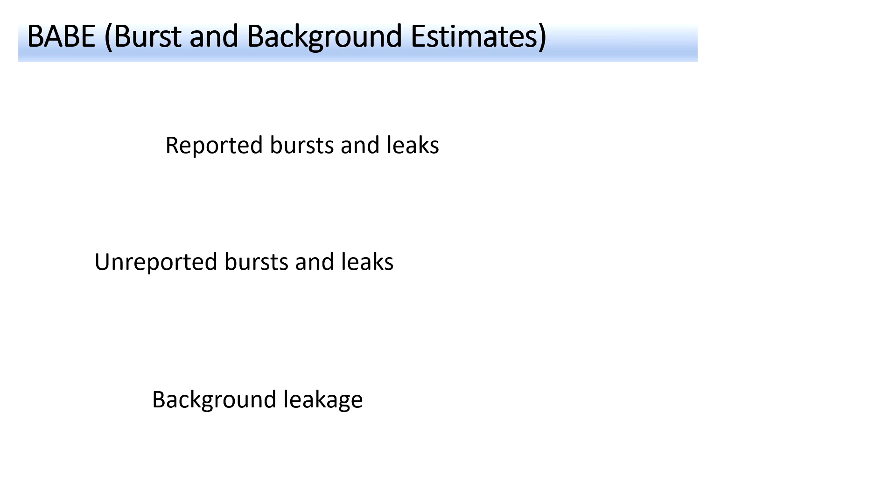Alan then came up with the burst and background estimates concept. I was there the night that he had this eureka moment. So we have reported bursts and leaks come to the surface, don't run for very long. We have the unreported bursts and leaks that you go out and find with active leakage control. And then below that, we have background leakage. And this is my picture of background leakage in a rural area. Basically, it's what you're left with after you've accounted for the other 2 elements.

The other way of looking at it is, I've used this iceberg analogy before. Reported leakage above the surface, unreported leakage below the surface, and then background leakage being the deep dive. But there are various definitions of background leakage. You can see the one that's referred to in the Water UK route map being the level of leakage that cannot be reduced further using current detection technology.

What we focused on in this project that I'm going to talk about is the minimum achieved level of leakage in DMAs. That's the historic minimum achieved level of leakage in the DMAs, and effectively it's what a normal leakage detection suite doesn't pick up. The question we're trying to answer in the project is, can we reduce background leakage? The current definition just accepts that it's there, it's made up of a lot of small leaks, and we can't reduce it unless we do pressure management or mains replacement.

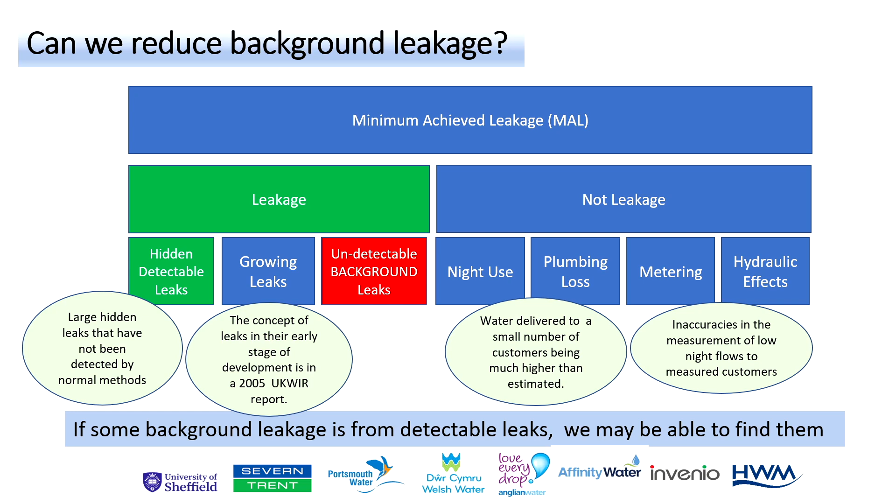What I've shown on this slide before, we're trying to say, is that MAL level of leakage in a DMA, is some of it not leakage at all, but due to these other components? And if it is leakage, is it undetectable background leakage in the red box, or is some of it in the green box, the hidden detectable leaks? So that's the question.

The project aims to redefine this MAL level by trying to locate and then repair those long-running hidden leaks in the DMAs. It's led by Welsh Water with support from 4 other water companies. It's a £3.5 million project, 2.4 million of which I think, according to Ian's slide, is funded from Ofwat. The rest is from the water companies and from other aspects. And then the contractors are HWM and Invenio and also the University of Sheffield.

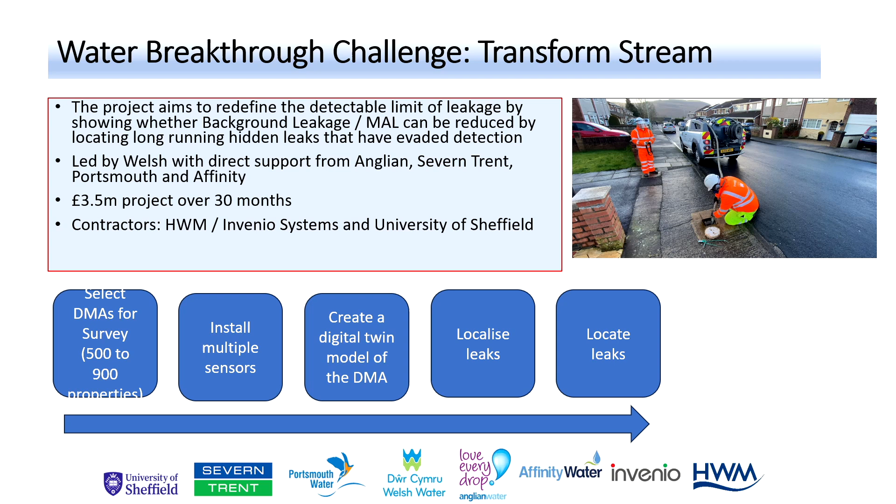We're selecting DMAs between 500 and 900 properties. We're installing multiple sensors of different types. We're then creating a digital twin model of that DMA. We're using that model to localize leaks, and then we're trying to locate the leaks.

We started in late 2022, and the first thing we did was to look at data from the companies. I'm not going to go into the detailed contents of this report, but it is available publicly through that Figshare link on the University of Sheffield website. The key thing, we found that half of the reported level of leakage is due to the MAL levels in DMAs. So that's an important number to recognise.

The DMA surveys that we've started, we have Phase B and Phase C. Phase B, we've done 10 DMAs and we've completed the surveys of those 10 DMAs. We produce an all-connections model of the DMA. We're not grouping demand to nodes in the DMA. Each connection in the DMA is a node.

We've got consumption profiles for each node, for each connection at 1 minute resolution based on our Stop.Watch temperature logger data and other data modelled by University of Sheffield for where we can't get a logger on. We're also now starting to review paradigm data from SME for all of the DMAs.

We're fitting pressure loggers to every available hydrant, between 20 and 25 per DMA at 15-minute values. We're doing transient logging with a newly developed logger from HWM. We're installing acoustic loggers at high density, and then we're combining all those data sets.

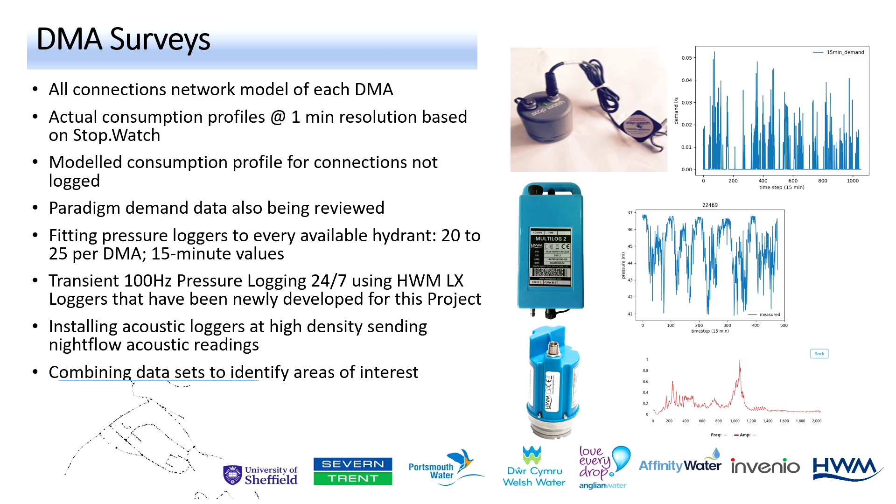So the first thing we do is we do a flow balance. So the top line on this upper graph is the DMA inflow. The green line is how much we're estimating is going past the customer's stop taps. So that's in terms of use events and customer side leakage. The difference we're calling unaccounted for water. It's been reported as leakage, but we can now see that not all of it is leakage.

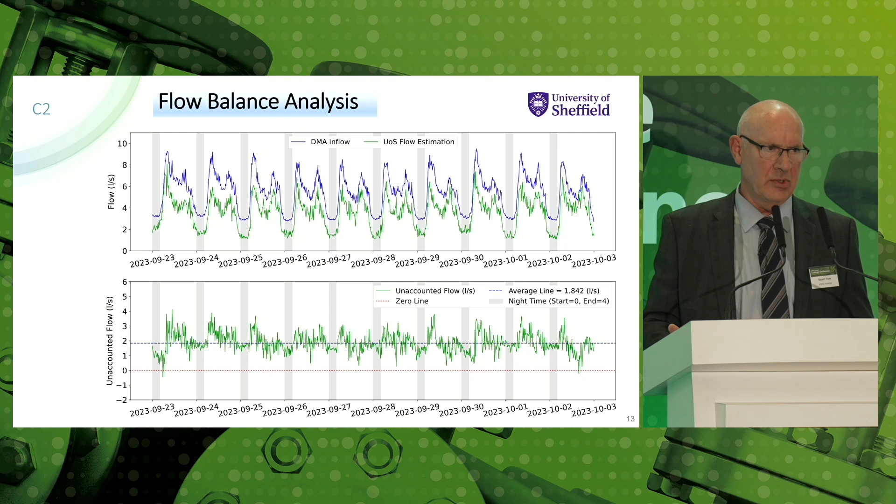Tier 1 is our algorithm saying we're more than 87% confident that that is a leak. Tier 2 is more than 63% confident. So, you know, we're pretty sure these are leaks. And when the water company does a follow-up, we're finding that those leaks are largely internal with some external leaks.

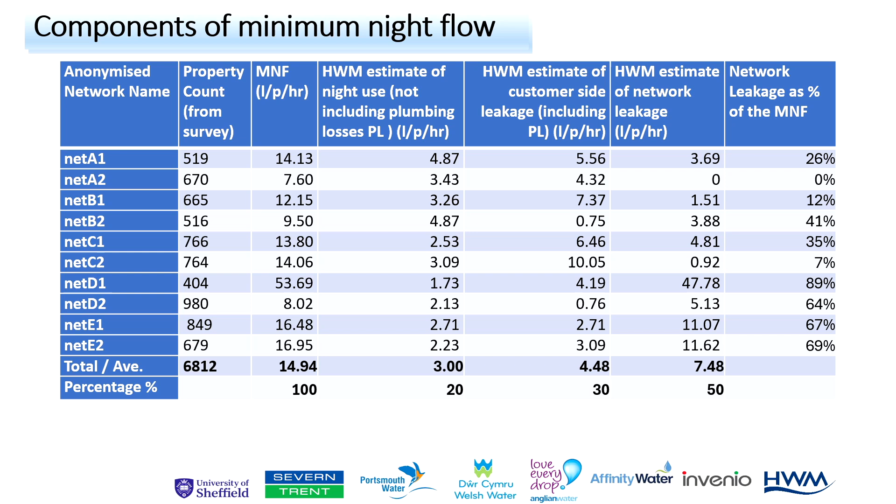So those are ballpark figures, but you can see in the right-hand column how variable that figure is. So the variation in network leakage as a percentage of the minimum night flow is from 0, in other words, there's no leakage on the water company network, to 89% of what goes into that DMA is on the network somewhere. I would like to go into this in detail, but I don't have the time, but no doubt I'll get questions on it. I've tried to show this graphically.

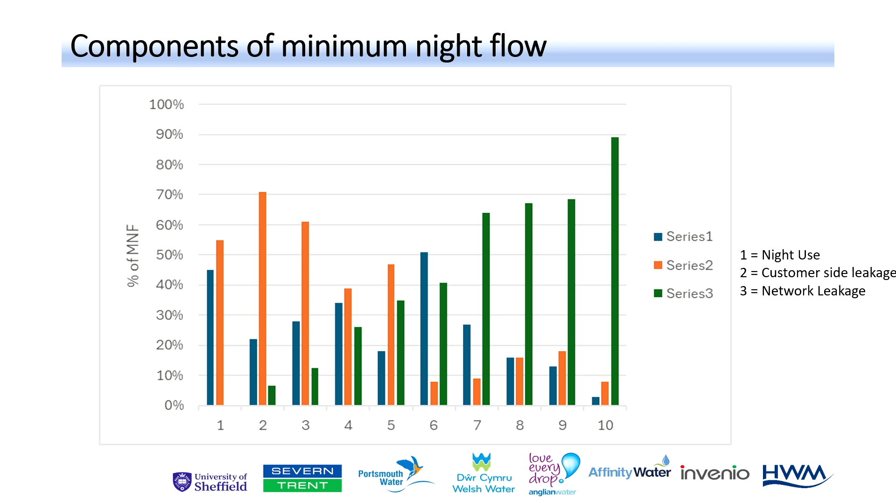So the green bar is the network leakage as a percentage of the minimum night flow, and you can see I've ranked them from least, in other words 0, through to the most. So we've got probably 3 DMAs that have 10% or less of the night flow being leakage on the network, and at the other extreme we have 4 DMAs where more than 60% of the minimum night flow is accounted for by leakage on the network.

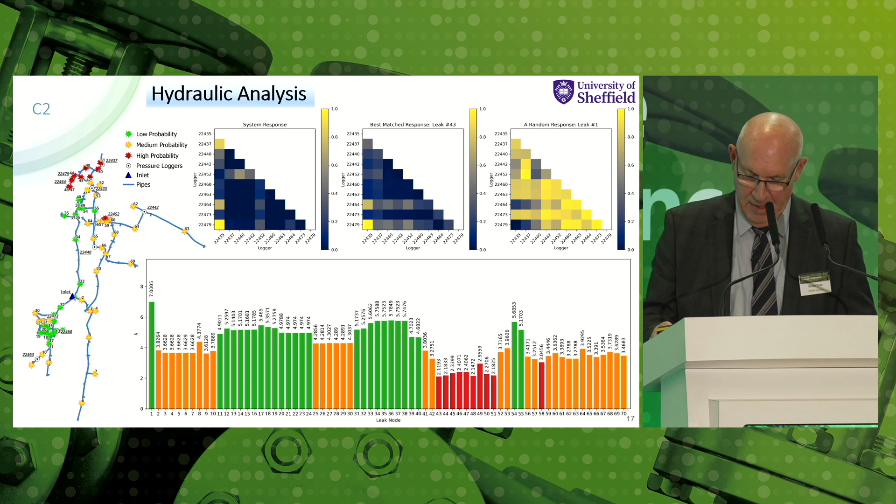They've then developed new techniques on the acoustics. We've got a PhD student working on the project full-time. We're not just relying on the alarms from the loggers, we're actually recording and analysing the acoustic data from the loggers. I can't go into the detail, but where we see these red dots in the top right of these graphs, that is indicating a leak at that point in the network, which isn't being picked up on the alarms from the loggers.

Not a lot of time to cover this, but I've tried to summarise where we stand with each of the 10 areas. If you look at the column marked network leak, yes or no, you can see there are 3 DMAs where we're saying there's no leakage on the network. But then there are 3, 4, 5, 6 where we're saying yes, there is a leakage on the network, and all the data is telling us we should be able to find it.

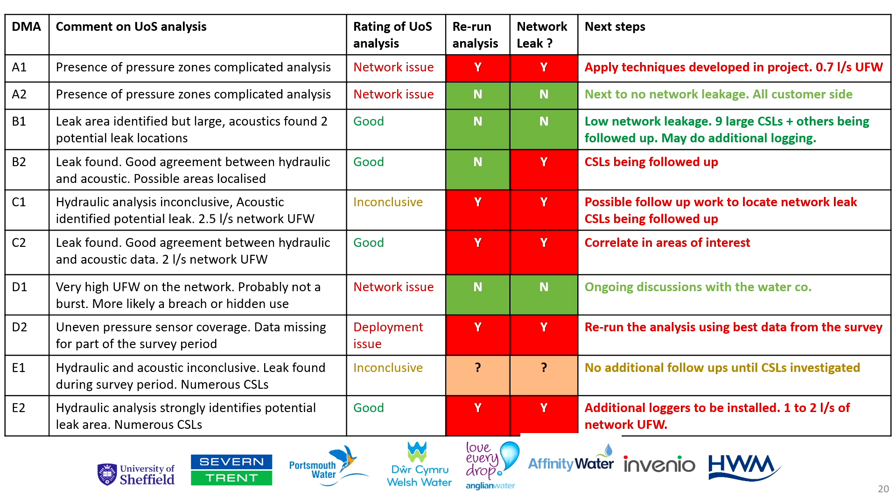When I say leak, there's at least one of those DMAs where we're pretty sure it isn't a leak. It is water going somewhere else. It's too big. The amount of water is too big for it to be a leak that we can't find. It must be something else in the network.

We're also going back to some of the first DMAs using the techniques we've developed to see if these new techniques will help us identify where that leakage is occurring. But I just think that's quite illuminating.

So what learnings have we got? Well, the first box on here I showed last year. What we're saying is it's highly unlikely that background leakage is due entirely to small leaks below the detectable threshold, as defined in the managing leakage reports. All the information we're getting is suggesting that isn't the case. We're not saying there aren't any small leaks, we're just saying that doesn't explain the whole of background leakage.

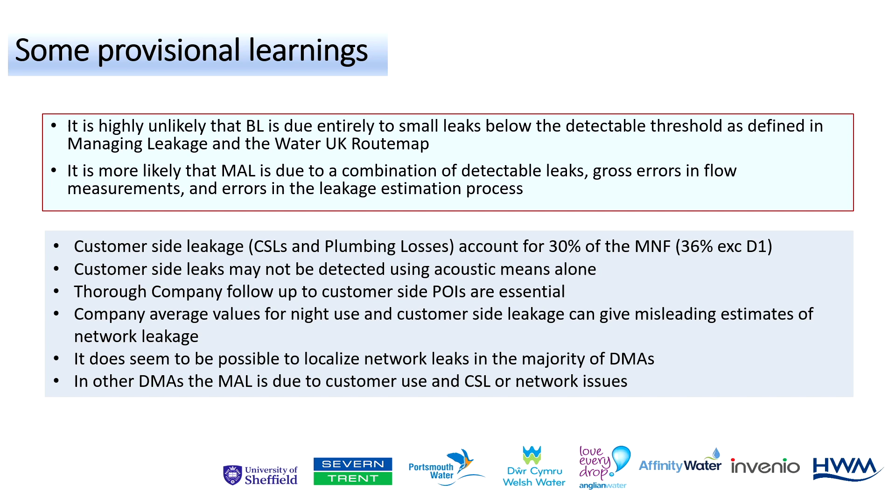It's more likely that minimum achieved level is due to a combination of detectable leaks, errors in the flow measurements, and errors in the leakage estimation process. What we're also saying is customer-side leakage accounts for 30% of the minimum night flow. If we take one of the areas with the highest level of network leakage out, it's 36%.

Customer-side leaks may not be detected using acoustic methods alone. We've got various examples where we pick up a leak with a stopwatch, which you can't hear on the stop tap. It just doesn't make enough noise to transmit to the stop tap. Thorough company follow-ups are required on those points of interest on the customer side.

The average values that you have for night use and plumbing loss do not apply at the DMA level. There's just too much variability, not just in night use, but also in plumbing loss. So if you have an average plumbing loss value of 1.4, which was the UKWIR report we did a few years ago, if you apply that 1.4 to every DMA, you could be misleading yourself.

You can have DMAs that have a very low level of plumbing loss, which we've seen in a smart metered area in one of the water companies, and then you've got areas which have a high level of plumbing loss. We're also saying it does seem possible to localize these network leaks in the majority of DMAs where we're convinced there is something. In other DMAs, the anomaly is either due to customer use or customer-side leakage.

Last slide, probably pleased to know. Where do we stand? We've got to follow up the actions in 4 or 5 of the 10 Phase B DMAs. We're on with the Phase C DMAs. We've done 5, we have to do the rest.

Phase D of the project is an uncertainty analysis, which we've brought Steve Toombs back into the team to help with. We need to consult more with the industry, and I'd appeal for people to get in touch with us with any stories or ideas they have. Phase E is the reporting stage, and we need to disseminate the results, and we've had some support from Arup on that. I started with an elephant.

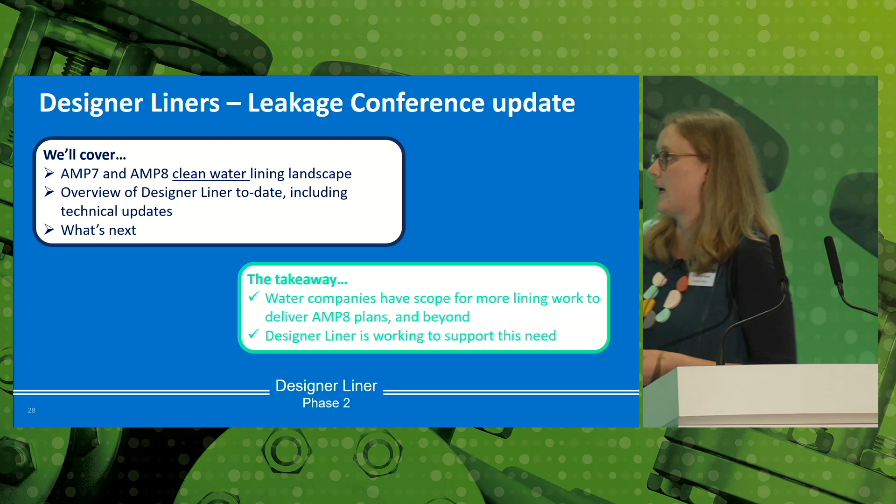We just keep digging holes and replacing pipes. We cannot afford that, and we have to think about rehab. Designer Liner, I hope we can show you today, is starting to support that need and reinvigorate some of the lining sector.

A bit of an overview of the project - why are we doing this work? We started off with an UKWIR project, then had phase 1 of the Ofwat Innovation Fund project, and we're now on to phase 2. To date, the project has had about £3.6 million of investment in total.

There are a couple of challenges we needed to address with lining. Regulation in this country around lining is really stringent. Suppliers, installers, and water companies said that is really hampering innovation, and they were not going to invest unless somebody did something differently. So it was an ideal project for the Innovation Fund to look at both asset lifespan, and also leakage.

Testing - people said, I'm not confident in liners. I don't know if it has a long enough lifespan. Is it going to deliver what it's needed to deliver?

A bit about the ambition. Manufacturers and installers said, I'm not willing to invest in the UK, I see no ambition here, so we need to reignite that. People were also very uncertain about the cost of lining, and this was an opportunity to use some sector funding to address that.

We've been funded by the Ofwat Innovation Fund, which is fantastic. The overarching aim of this project is to develop a new lining solution and route to market. We want this lining solution to be fit for the 21st century. We are not knocking what is on the market, but we think we need to do better. So we're looking for something with an assured lifespan that will deliver the financial benefit you need in order to invest in lining.

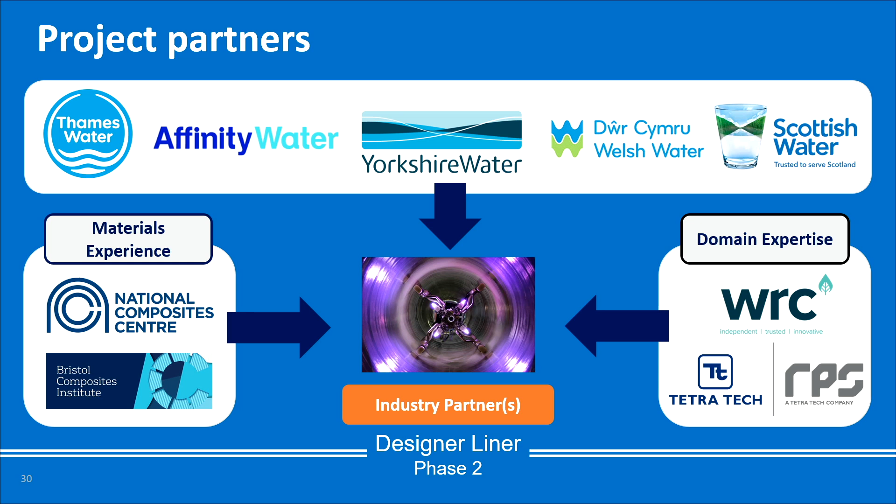We're now at the point in the project where we can start to look for those lining industry partners, and we've had manufacturers knocking on our door saying, can we get involved? And we've had to say, no, not yet.

Because the point of this project is to really design a lining solution that water companies want and need, not one that a lining manufacturer thinks we need. So it's important for us to own that design process. Joe will talk about that and the decisions we've started to make to ensure we get a lining solution that's right for us, not one that's simply delivered to us.

Thanks, Katrina. So the lining landscape, as we see it at the moment - you're hopefully aware, those of you in water companies, that your business plans have all got a significant increase in the amounts of mains renewals you'll be doing. However, if you look at what the PR19 planned renewal percentage was, 2.07, and what the planned PR24 percentage is, you'll see there's not that much difference. However, actual performance at 0.64 suggests we've got a long way to go.

So we need to do things subtly differently. £2.3 billion will be spent on mains renewals in the next 5 years, averaged at £277 per metre, thanks to Ian's colleagues. However, when we've looked at it, we think the lining solutions will be around £175 a metre.

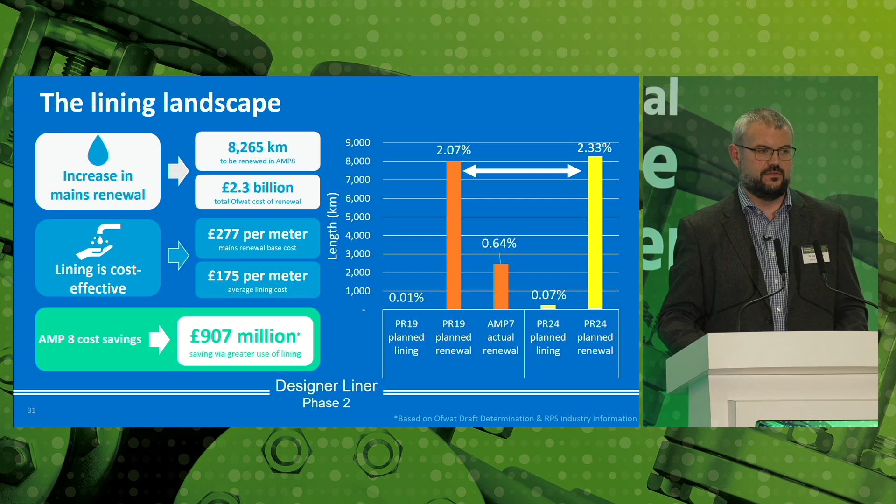Which means there's a potential AMP8 saving of £907 million. Think of all the things we could do with that 907 million - we could do X amount more kilometres, lots more PRVs potentially, a leakage review potentially, Ian. So there's lots of potential things we could do with that money. And again, this is £3.4 million of expenditure, which we think is going to pay back 907 million in a 5-year period. That's a pretty good payback in anyone's book.

So where have we got to? Fundamentals - and this is where we've all been taken back to school by the guys at the NCC, which is fantastic, about how you actually go about doing these sort of projects. These guys do these sort of projects for some people you might have heard of - Formula One teams, the British cycling guys. And again, if you ever get a spare few minutes and you're in the Bristol area, give Keris a ring and get a site visit, because oh my God, it is geek fest of the stuff these guys do.

The big spinner that they can weave stuff with, all of the stuff where they're like, oh yeah, you can't look in there, that bit's top secret, can't look in there, can't look over here, that bit's top secret. You can look over here though - we're doing smaller stuff that you can look over here.

But all of these things where they're looking at how they can manufacture a wing - is it 30 seconds, I think, for the full layup, something like that, Keris? Yep, they're not there yet, but they're looking to do it in 30 seconds rather than the sort of 20 hours it is at the moment. A full wing for a full aircraft, mind-boggling sort of stuff.

But one of the things they've said to us is that you need to have this design intent document - what is it you're actually aiming for? And we were like, well, we've got that - we want a liner that lasts a long, long time and doesn't leak and all of this stuff. And they're like, yeah, you've got to be a little bit more specific about this sort of stuff. So we've had to go through a load of load cases, do the material analysis, and that's allowed us to get to the sort of structural model type approach we're looking at.

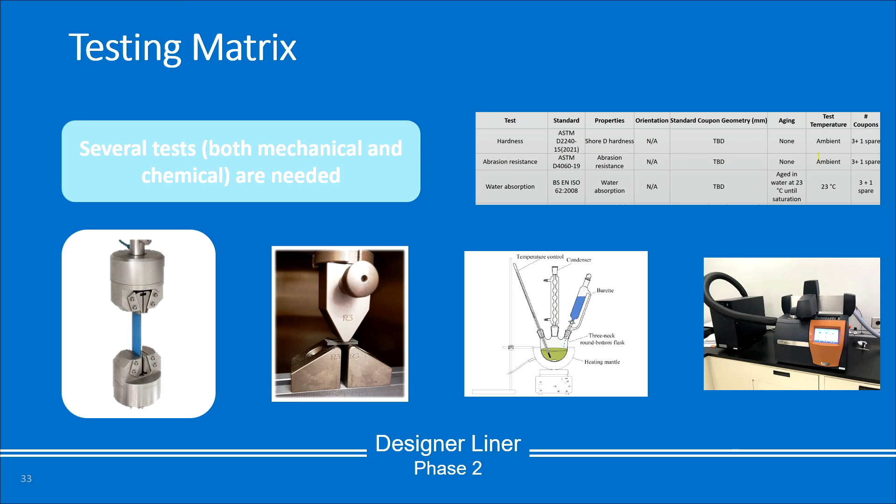So there's stress testing, impact testing, the leach testing we've got there, and then the thing in the corner - probably only 2 or 3 people will recognise - is a differential scanning calorimeter, which tells you how stable your polymer is. That's the thing I used in my PhD for loads, so I had to get a picture of that in. But these are the sort of things we need to look at and understand how they're going to make the material better.

But also we've got the material science bit that comes in, and this is the bit where in all the hair shampoo adverts of old, they go, and this is the science bit, and some boffin sort of explains the science bit. We don't have time to go into the full science today, unfortunately. But the one thing that we need to do is that we're looking to evolve these materials.

We've got lots of different additives that have been used in many different sort of things, from, again, the boats that were used for the America's Cup, the way that people have been looking at structures for fins in propellers and that type of stuff that have got this toughening and healing sort of properties.

And again, the thermo-reversible, photo-reversible sort of way that, i.e., as Katrina said, we could put a pig down that heats it up slightly, or even puts a bit of UV light, and all of these micro cracks that we get at the moment in polymers would start to heal themselves, not technically self-healing, but for everyone here, heal themselves.

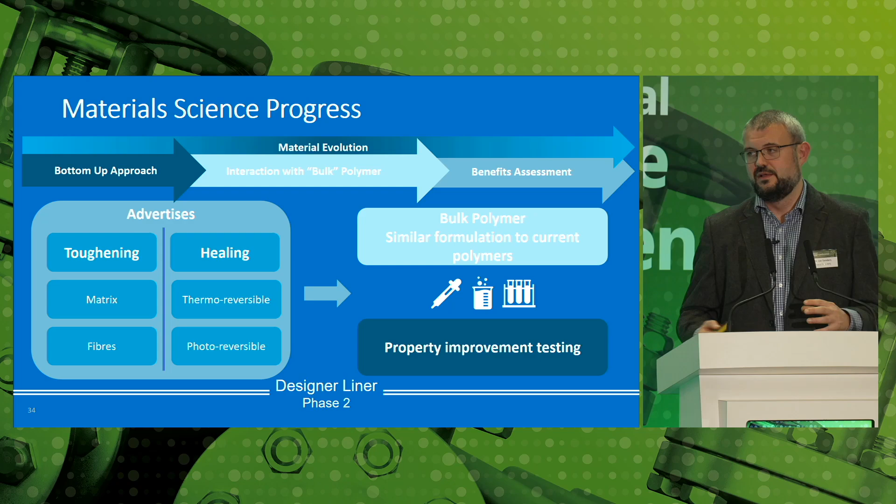We also need to understand what the matrix and the fibres and how they're going to interact as well. And again, this is where we get the guys from the BCCI. We've got 2 fantastic postdocs working on these and understanding how they're going to work through. The thing is, we can't just go to a manufacturer and go, can we have a load of your product so that we can test it for a while?

But what we are doing is using bulk polymer products that are available readily off the shelves from anywhere and understand how these additives impact these polymers. This will give us a starting point to then go and do that full piece with the lining manufacturers and say, based on this, which is very similar to your polymer that you've got, it has done this. It has increased the lifespan by X amount. It's been able to self-heal. We've done this.

One of the things that the BCCI think might be possible is that actually just from the thermal transfers the water has between summer and winter, that might be enough heat to close these cracks. Now this might be a point where actually we don't have to send anything down. Now wouldn't that be fantastic? This pipe just improves itself.

So the water, again, polyethylene is very much degraded by water, as the Upware project showed. But some of this stuff now, potentially if you add something else into it, the water then starts healing itself. Fantastic. So that's the progress of where we are now. I'm going to hand back to Katrina just to sum everything up and look at the timelines of where we are going forward.

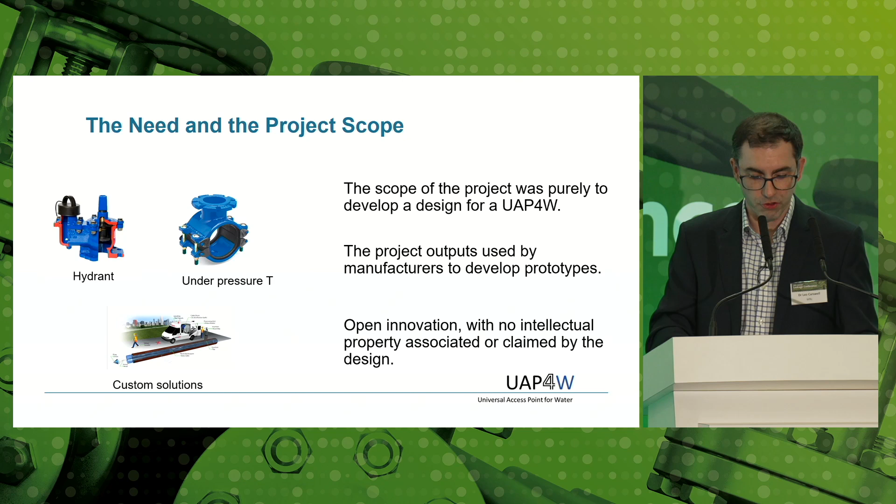So I'm going to talk a little bit about challenges and vision and specification. I'm going to talk through this quite quickly, but it was a key part of the process that we went through. So we started off with some workshops on this project, again, with lots of stakeholders. And one of the things we asked at that first workshop was about, what's your vision for this universal access point, this so-called universal access point?

And a number of key points there people were talking about. We'd love something that's just usable by the water companies. We don't have to worry about the fire service needing to use it. We can install it rapidly. We can install it opportunistically. We can install it when we have an opportunity to install it. So we have a leak somewhere. At the same time as repairing that leak, why don't we put an access point on there? That way we're building up the potential to be able to survey our network.

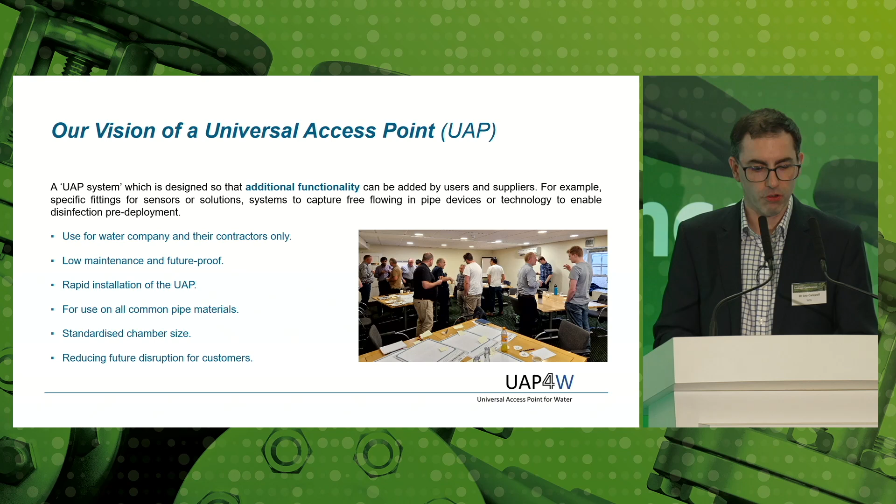A key point that the stakeholders fed back to us: don't get drawn into trying to make this universal access point do everything and be super complicated and have all the functionality. Create something that is suitable for the network, suitable for the industry, but supply chain, with their wisdom and their technology innovation, in the future can bolt onto this and add new things onto it, and it can evolve in the future. So that was a key point.

We also challenged ourselves to look at the barriers and some of the challenges with this type of technology. And I think we recognise that developing new technology in the water industry is quite challenging. We've heard already about implementation and adoption of technology. We're getting better at it, but it's still very difficult in the water industry. It's a slow process. So we challenged ourselves to look at some of this and the sort of things that the stakeholders were talking about.

You can imagine we're talking about putting a lot more access points into the water network to understand it better. People are immediately thinking, what's the risk in terms of water quality? We've got all these access points. How do we get water companies and manufacturers on board with this concept, this idea that you're developing? How do you turn this project into a product at the end? How do we remove the barrier of installing something into the network and the time that takes, and value installing that into the network?

And we came up with a design specification. So, with all these stakeholders, academics, contractors, all chucking things in from different sides, we came up with a specification. 28 items, and some of the key points there. So, obviously it has to meet Regulation 31. We were talking about a 100 millimetre access point that you can put something in. So it's 100 millimetres, so it's larger than current access points, suitable for a range of different pipe materials, range from 80 mil upwards, so it's suitable for use within the distribution network.

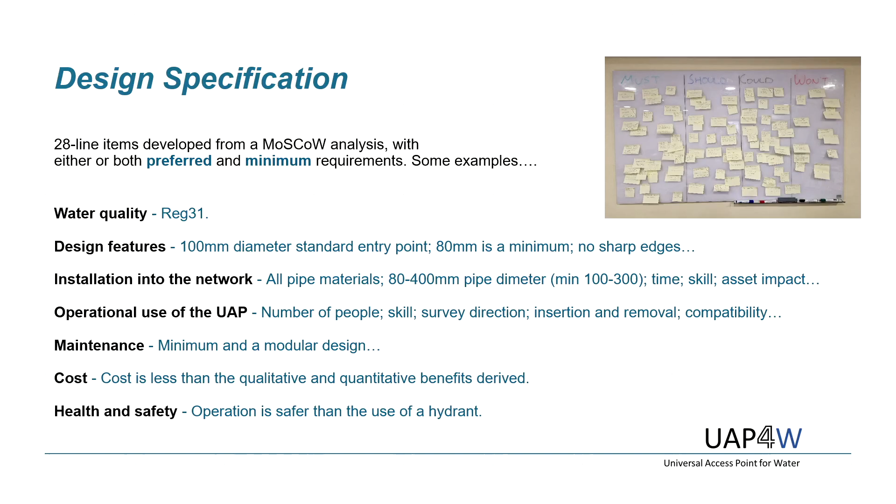We've got access points on trunk mains. That isn't where the challenge is. The challenge is understanding the DMA better. And of course, managing maintenance and cost and things like that. So, I'll talk a little bit about the economics. It was mentioned in the last talk. No point in designing something if it's super expensive and super complicated, too expensive for the water industry to adopt. So we actually spent quite a lot of time understanding the use cases and the benefits for a UAP, and understanding the numbers of technologies that you might adopt. Therefore, positioning this so a technology supplier could take this forward afterwards.

And I've summarised the whole report into one page, but the feedback from the water companies was UAPs could help us with pipe condition assessment, they could help with access for sensors and robotics, and they could help us with DMA leakage. They were the top use cases. And through some quite detailed modelling and analysis, we were able to look at the sort of numbers of these fittings that you could imagine the water industry may be installing in the future.

And it's quite considerable. I've put a very brief summary there, but between 70 and 370,000 units we could imagine. And these are quite conservative estimates based on specific information of our networks and those use cases and the benefits that they could deliver. It could be a much larger number. But the importance of this is that if someone is going to take on board the outputs from this project and develop a product which they're going to sell, they want to understand that there's a market there. And this is the foundations of understanding that market.

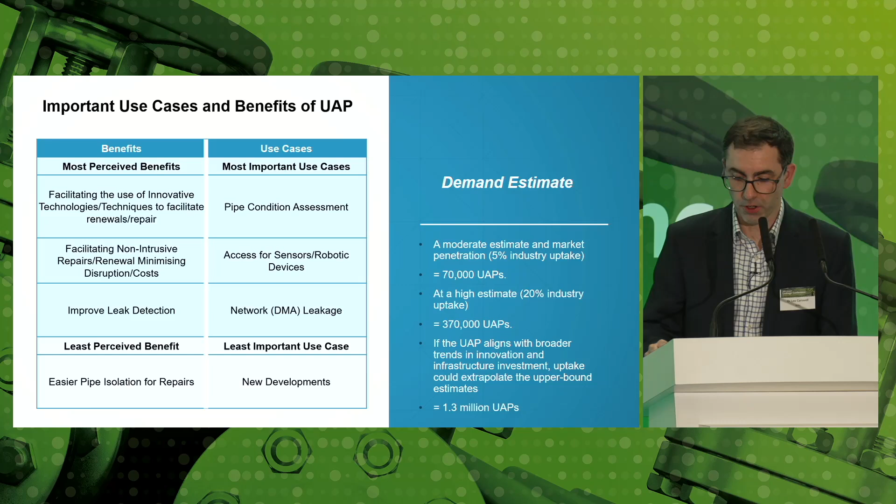So, talk a bit about the designs, because actually that's a lot of what we did. So, our objectives were to develop some design ideas based on the specification and to engage with a range of stakeholders and challenge those design ideas. So they weren't just WRC's ideas, they weren't just Jez Heath's ideas, they were ideas that had been challenged by the industry, by our sector.

So we developed four ideas, four concepts, and I'm not going to talk about these four concepts here, but initially we developed four very different ideas. They were taking the challenge that the specification set and interpreting them in different ways. And we took those to the stakeholder group, and we had a workshop where they assessed those and scored those against the specification. And these graphs, if you can only spot the red and the green, that's all you're meant to be able to see.

We found that two of these aligned better with the specification, and the green shows where they align better with the specification, those individual items, and the red shows where they don't. So we had two ideas that the group thought were worthy of taking forward, and two ideas that probably weren't. Maybe they were too complicated. They couldn't quite see how they should be taken forward.

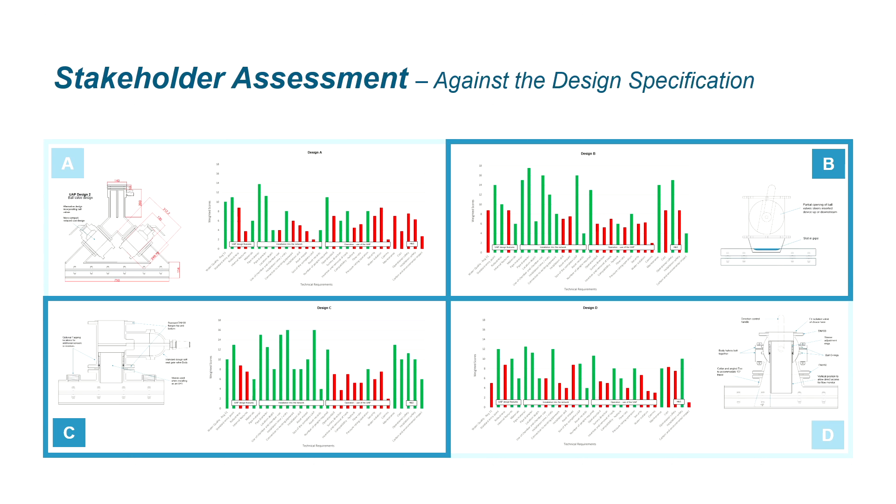So the next bit of the project was to refine those ideas, take those ideas further and closer to something that could then be adopted by supply chain. So there's two ideas that we took forward. Our objective within the project was just to refine it to one idea. But with all good research projects, things change as you go through, and we had two good ideas that complemented each other. They were different, so we said, well, why don't we take both of them through? That gives more options for the supply chain to look at by the end. So we've got two ideas here.

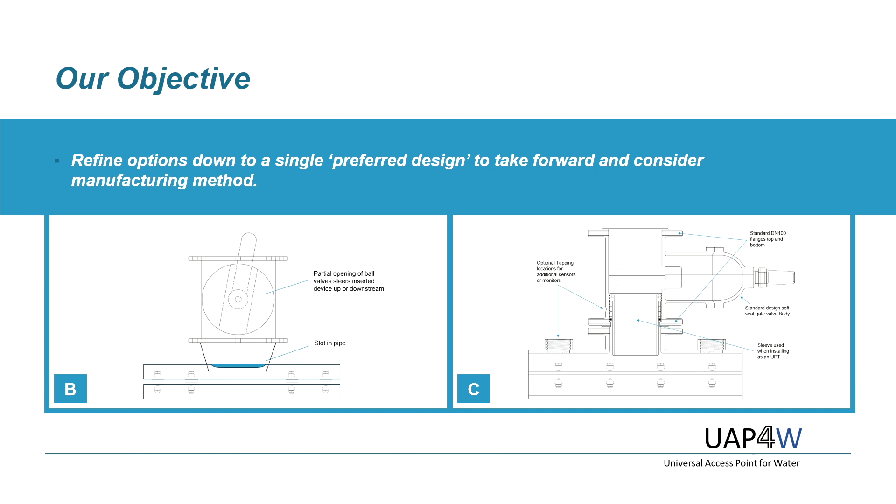The first one on the left, B, is a design that's based on a slot that's milled into the top of the pipe. It's a repair clamp with a milled slot and a ball valve that you can use to angle the access into the pipe so you can go upstream and downstream. The second design, much simpler, 90-degree design, but is focused on including an element which protects any technologies you put in from the cut edge that you would have from coring out a pipe when you do a live coring activity. So two different approaches, and I'll talk a little bit about those in a minute.

First of all, partway through the project and in parallel, we looked at some slightly different technologies. These are live tapping technologies which can be installed live, and they provide a stop valve. So these are technologies that are not a UAP, but they're quite interesting because they incorporate live milling or coring into the pipe. They actually incorporate live coring to the full diameter of the pipe.

So you can imagine using some of this technology, you can actually get an equal T on a pipe. So on an 80 millimeter pipe, you can have an 80 millimeter connection onto that pipe, which is not what you can do using conventional saddles and technology. So quite interesting, and it's a bit of an enabler to be able to evolve some of our other technologies. So I'll talk about the two designs very briefly.

There's a huge amount of information that the project has produced, which is freely available, and I'll signpost that to you at the end. But this first design is Design C. This is all about protecting the cut edge, which you get when you do a live tapping. So this design utilises existing components. We've got an existing repair collar, an existing valve. The really interesting, clever bit is the bit that's actually sitting between the valve and the repair collar.

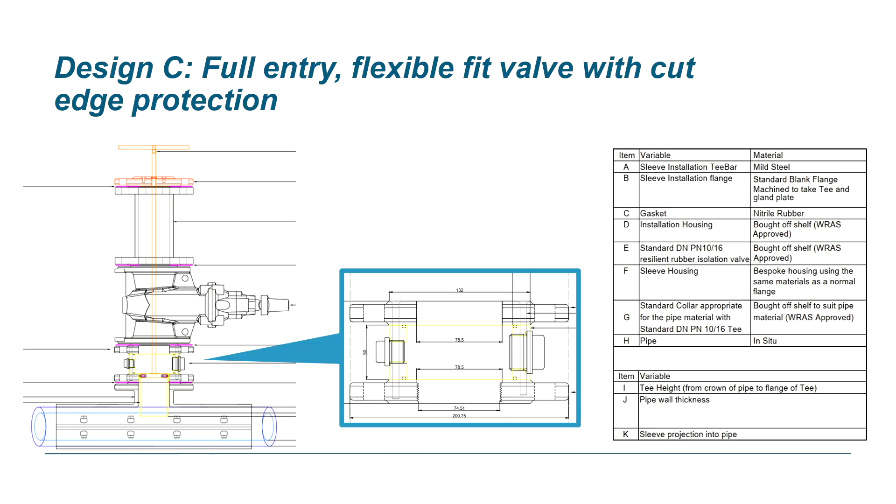And this is the bit where the sleeve that goes down into the pipe is held, and also it has the potential to have tappings. So you could put a sensor on there, or you could do an air release valve. And this is all made with products that are already standard in the industry. They all have Reg 31 approval. They're all relatively low cost. So this was all moving towards that direction.

The second technology, a little bit different, was around using, as I said, a ball valve. So this again uses a standard repair clamp. The concept with this one is that you could mill a slot along the crown of the pipe, going along the pipe, and use the ball valve to angle, whether it's a tethered technology or not, the deployment of that upstream or downstream. And that gives you more control of the deployment. So.

And my final slide, Bob, hopefully I've helped you catch up a little bit of time, maybe.

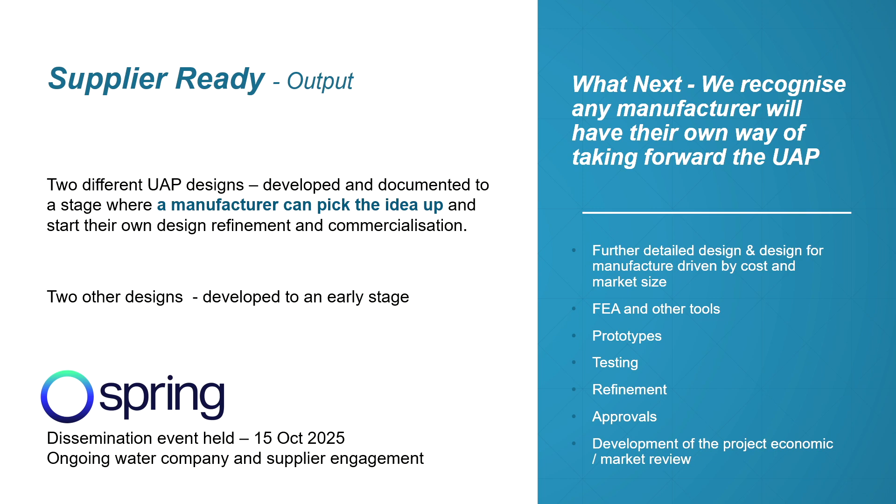So, yes, this project was all about developing concepts and ideas. It was not about building prototypes, building something that would be trialled. The expertise in all of those aspects in terms of prototyping, design for manufacture, design to be the right cost, the right materials, approvals, sits with the supply chain.

And that's the next step for this project, is to take the ideas that we've developed here, and for the supply chain, a number of suppliers or a single supplier, to take those without any IP restrictions and evolve and develop those to supply a solution back to the water industry.

Finally, we've been engaging with Spring. There was a dissemination event back in October. The recording of that is available on the Spring website, and all of the outputs from the project will be as well. And Spring will be supporting the project going forward in terms of engaging with suppliers. That's it.

So I think we've got a couple of questions for Leo here. Firstly, with so much suspected losses deemed to be on customer supplies, no, that's not the one. Sorry, I did see one here. I can remember it actually. The concern was basically if we're going to be putting all of these devices onto our network to get better access, what does that do to our background leakage?

Yeah, you are creating more points in the network, aren't you? So I would say, obviously, there's a benefit. The whole concept of this is it gives you access to be able to monitor for leakage, to be able to detect that leakage anyway. Just got to make sure the workmanship is right. Just got to make sure that when these are installed, they aren't leakage points in themselves, and they actually have the function that we're envisaging, that they're a benefit to us, not a leakage point.

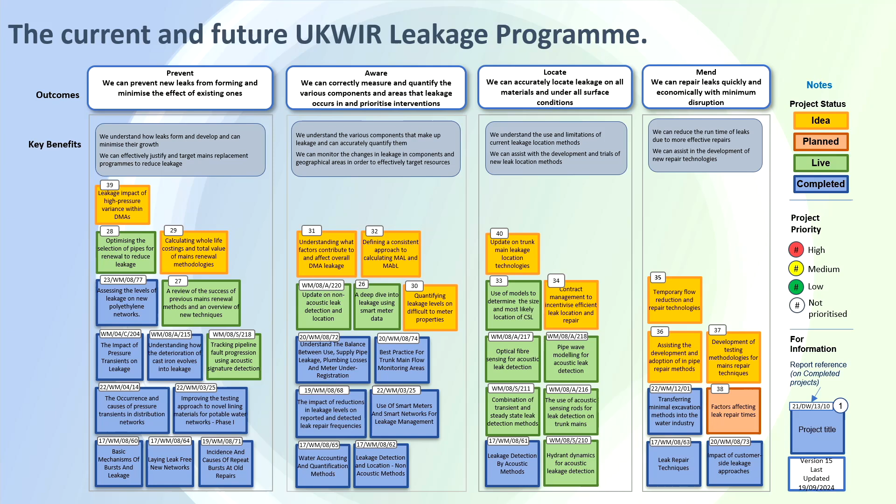Blues are projects completed, greens are live projects at the moment, oranges are projects coming through, and the others are ideas we've had in the shower that we thought were good. There's a load of work going on there. We are the busiest of the UKWIR programmes. We started well under Dennis Deller, and we've continued that momentum.

We've done the Leakage Innovation Heat Map, published and available from the UKWIR website - there you go, thank you for actually using the QR code, wonderful. This was basically born out of when I came into the industry and started doing this on UKWIR, somebody said there's a lot of duplicated research. Okay, let's find out if it is. So I went and visited everybody, I said share your research plans.

Do you know what? We collaborate. Ian talked about that earlier - he said look, you need to do collaboration. And I said, okay, how can we collaborate more? Because in my view, this group is one of the most collaborative in the industry. Leakage, water leakage, is held up as being the exemplar of collaboration because we share.

400 water company projects, UKWIR projects, Ofwat funded projects, spring knowledge shares, all gathered together on one Excel spreadsheet where you can find out what's going on and who's working on what. Well received, as I said, by water companies, suppliers, and regulators as well.

But we recognise that it goes out of date. I did it originally in 2019, the first time. In 2023, October, I did the same again. Provisionally, in 4 years' time, I'm going to be travelling around again and doing it again because it goes out of date. We need to keep it up to date, we need to understand what's going on. You can tell Doug, by the way, he knows.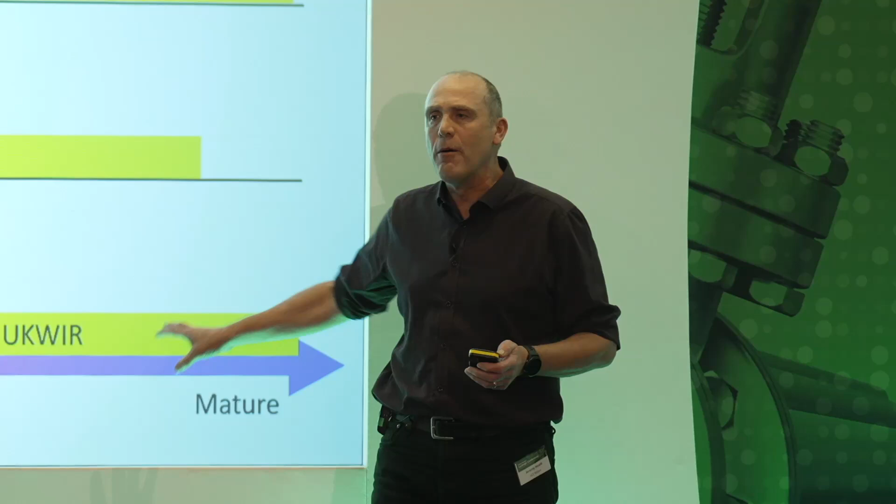Now, that's not to say that we won't see new solutions coming through. My own company adopted a new solution precisely in that area. But most of the research we're doing in that area is effectively going, who's doing it best? A bit of comparator stuff - everybody's got one, how do we just optimize this?

So our UKWIR research tends to be up at this end. Locate, you can see, is pretty wide - we've got stuff that's well developed and in situ, acoustic networks that have been rolled out, and we've got brand new developing systems coming through like satellite, dark fibre and things like that. People are saying, okay, how do we do it best, but also how do I actually install it?

Prevent has the widest breadth because over here we've got PRVs that we've been putting in for decades - well understood. But at the far end on our prevention side, as you've been hearing today about network calming and pressure reduction, how do we manage that, how do we bring that in sensibly? So it has a really wide breadth for that one.

And then finally, as you can see on Mend, okay, in terms of our UKWIR research, we're really at the fundamental stage there of saying, what's the cost benefit? But that's only the UKWIR programme.

When you look at the water company programmes, you can see that they fit out into far wider areas. Water companies are going all the way back to the fundamentals and going, yeah, UKWIR may only be looking at the best practices here, but I've just seen a new supplier and I want to have a look at what they're doing. So we've got a really wide breadth there from the company side as well.

Ofwat Innovation Fund takes you from mid-TRL levels up to almost BAU, late TRL levels and things like that. So we've got the Ofwat Innovation Fund projects coming through.

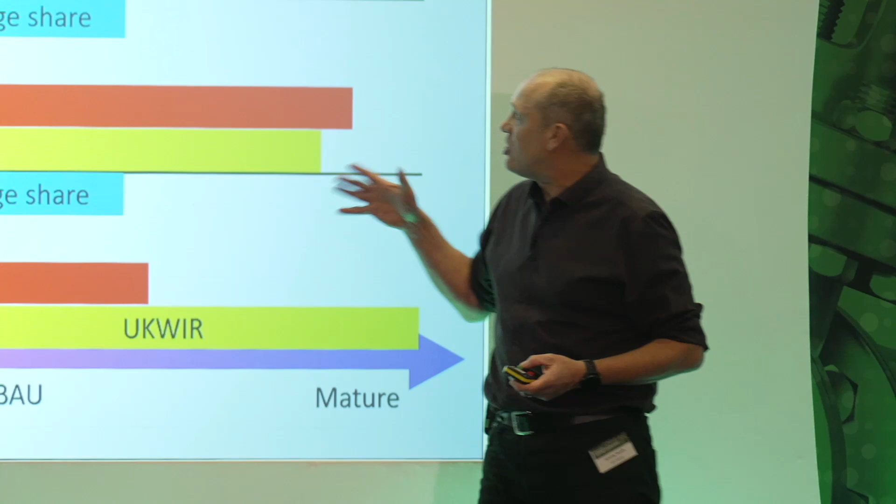And then, of course, there's the Spring Knowledge Share as well, that effectively says, okay, when it's nearly ready to go to market or has been done in trials and is being rolled out, it starts to be shared on the Spring Knowledge Share. There is a wealth of information out there about what is going on within this industry.

I was asked earlier today about where we sit in the UK as an industry in terms of our water leakage - where do we sit internationally? I was talking to New Zealand, it's one of those things where you get up in the middle of the night to speak to New Zealand. I was talking with them, and they were astounded at the kind of innovations that we've got coming through in the UK. We are driving down leakage without the tool that almost every country or city uses if you want to get it down really low.

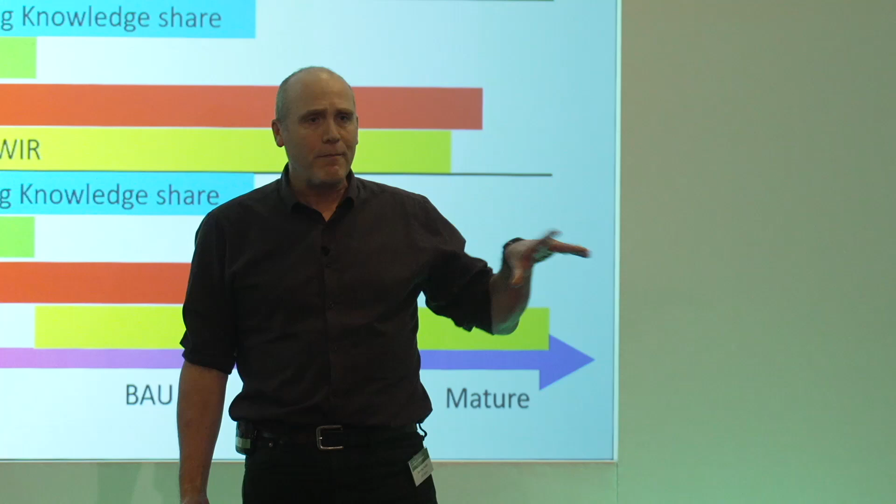Which is massive mains replacements. You go to Tokyo, they ripped out all their mains, replaced the whole lot from the 1960s. You go to Germany and you say, how much cast iron have you got on the ground? And they just laugh at you and say, we got rid of all of that. They've all done massive mains replacements, and that's how they've driven their leakage levels down.

We don't have that option. That is the last option on the table. We've been talking about it today, about how we manage that side, and we know that's going to come through. But how do we drive down leakage without doing that? That is why the eyes of the world are on the UK at the moment - because if we can do this, everybody will want to know how, everybody will want to take these technologies and methods.

Okay, UKWIR programme, as I said, 19 projects it is - I've done 18, I've got one which is just finishing and publishing out at the moment. We've had 4 dissemination events recently. What we tend to do with those is we schedule them in with the leakage managers, sit down and go through with them and share all the learnings so that as we're doing those studies, it gets out there as well.

Doug Spencer from Anglian, he is my co-programme lead. We attend every meeting of the leakage managers. It is important that we are there, getting feedback from what is happening in the industry at the moment - what are the key concerns, what are the priorities within that industry?

We ask the leakage managers to prioritise what we're doing. Doug and I will come up with a list of what we think we should be researching, what we think the priorities are. We throw it out to that leakage managers group and say, shoot us down, tell us what you think the priorities are. They come back and tell us, and that's what we start taking forward. So we understand and make sure we're addressing the needs of this industry.

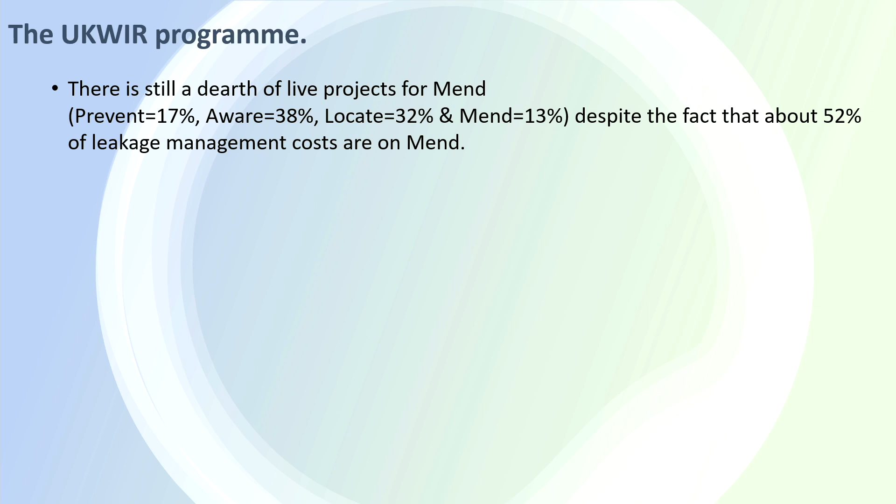What we know at the moment is there's still a dearth of live projects on MEND. You can see the percentages there. About 52% of our leakage spend is on repairing that pipe. It's the area where we've got to put a lot more into.

You've seen all the other comments today about where we are. Despite all of this fantastic innovation, despite the eyes of the world being on us, we are still struggling. I was asked about this the other day and somebody said, hang on, you're meant to be really good, you're meant to be doing so well, why are you guys struggling? Two words: climate change. When we brought out all our plans and said this is what's going to happen, this is how we're going to drive it down going forward, we knew about climate change. What we did not understand is how quickly it would affect our industry.

I've been talking with the leakage managers, I attend their meetings. We know that 2-3 summers ago we had this massive breakout due to soil dryout, but we've seen it every summer since. Even in wet summers, we're now starting to see this soil dryout causing mass breakouts within our areas. Leakage managers are running scared of the effects of climate change upon their ability to drive leakage down.

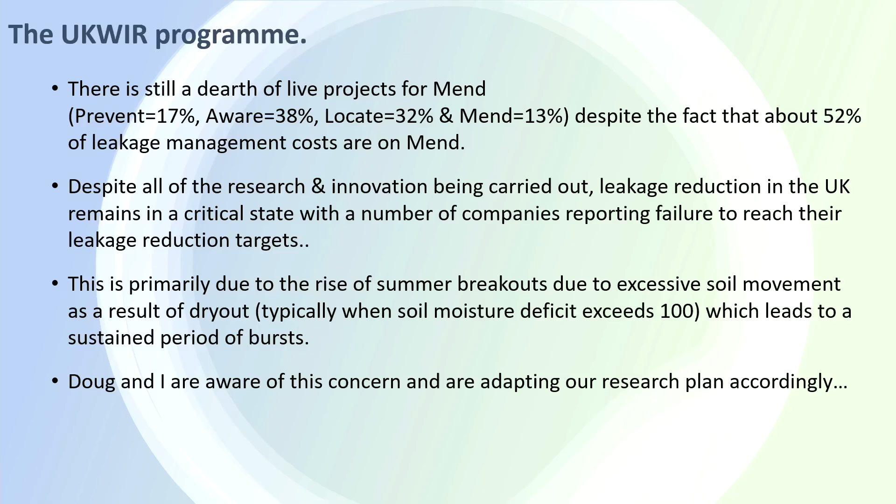We're aware of that. Doug and I are adapting our research plan accordingly because we know this is going to be an increasing issue going forward.

We've recently shared these ones, a deep dive into leakage using smart meter data. This was a really interesting one. We looked at areas from Anglian where they had a high density of smart meters in an area, and we said, okay, can we therefore match it up? Can we actually do a balance on that DMA area? And the result was no.

It's really hard, even with smart meter data, to do that balance. One of the reasons behind it was the leakage data on customer side, because your meter is recording consumption and you will not have that confidence at any one second to say yes, that's consumption or that's leakage. Leakage tends to take us a number of days to become aware of on a customer side.

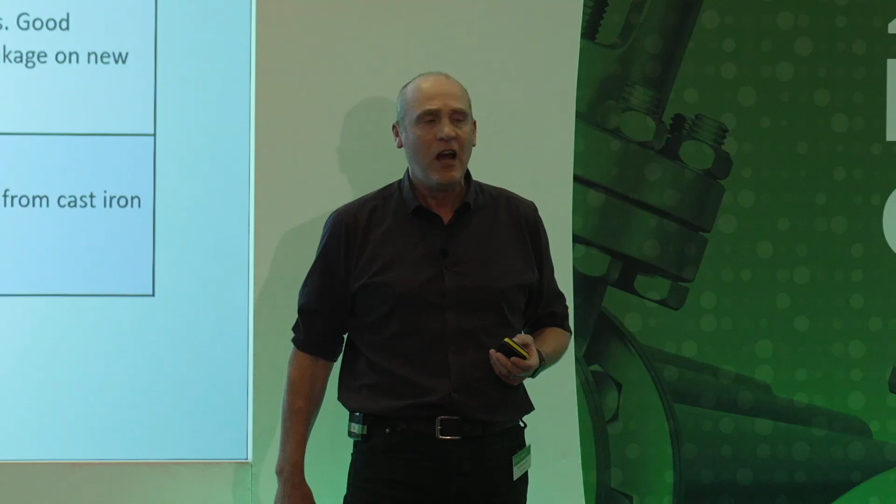But what that project did show is that if you get more than 30 or 40% meters within an area, your confidence in terms of sending the guys into that area massively increases. You were talking earlier, Stuart, about okay, we have these areas where we don't know whether it's consumption, we don't know whether it's big leaks or small leaks. One of the big problems is you send your guys into a patch and say go and repair, and then it drops all by itself. Once we start to bring that smart metering data in, it makes a big difference to our confidence in those areas. We say, actually, no, this is usage or it's leakage.

Assessing the levels of leakage on new polyethylene networks - sadly it still occurs, we still have leakage on our PE. What that report found is that good workmanship matters, and it was interesting as soon as you talked about how do we install the UAPs on there. Workmanship is important, even more so on plastic, and making sure you get a really good pressure test, that you've got a good process in terms of dealing with that. And then finally, the impact of pressure transients.

Had a Sheffield PhD demonstrating that and showing that, which was fascinating. He was here last year, gave his final dissemination a couple of months ago. Fascinating to see, and really giving us a good understanding of how cast iron is deteriorating and going forward.

So where are we going? I've got 4 projects which I'm now currently looking at, and these are going through the UKWIR voting, so I'm going to tell you about them. I'm allowed to do this - I did check.

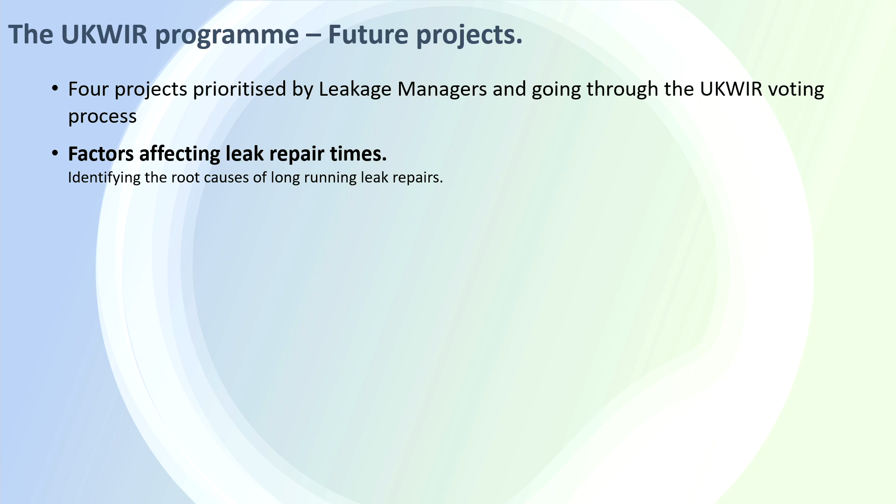They're not actual live projects yet, but they're going to go through the voting. Factors affecting leak repair times. I want to understand what are the root causes of long-running leak repairs. Why do some repairs take weeks, months, or even longer to repair? Is it down to the process? Is it the councils? Is it something like that?

Is it about that particular road? Or is it engineering difficulties? Is it the fact that we can't dig down that deep? Is it because it's going underneath a railway? Are there technical things that we could do to solve it? So we're going to start doing that.

Calculating whole life costings and value of mains renewal methodologies. We've talked about replacing pipe. Okay, I want to know what the cost of replacing pipe is, and I don't mean the financial cost. Thames Water put up recently a cost for replacing 1 mile of pipe in Mile End Road, London. The budget cost for that was £20 million. 1 mile of pipe. Why? Because there's loads of other costs involved as well.

But we also want to look at the social and the environmental and the carbon costs of these various methodologies, understand those, so that when we come to do mains renewal programs and when we have to ramp up, we've got the best understanding there.

Understanding factors contributing to and affecting overall leakage. This is another way of trying to come up with that. It was interesting, Stuart, the question to you, and then we were asked, was there any correlation with the mains type and materials? This is trying to build it from the other way down and going, okay, let's look at things like self-organising maps. And if we put all those data in, where's the weak and strong correlations in our DMAs?

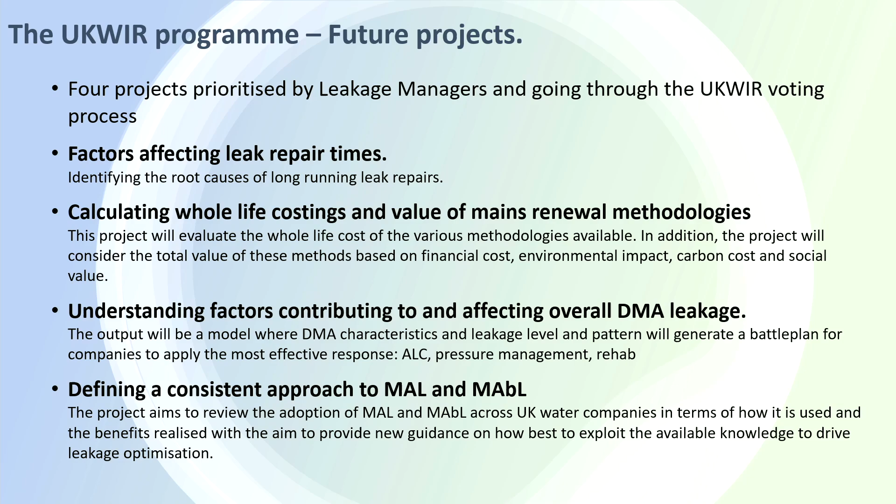And then finally, defining a consistent approach to MAL, the minimum achieved leakage and the minimum achievable leakage, and we're looking at that as well. And saying, okay, can we come up with a consistent way of doing that, because that will help inform us again going into areas. There we go. That's it in terms of UKWIR. I know I've got other bits to do, but let me pause there. Any questions on what I've said there as I rattle my way through my talk?

Hello, the young man in the middle there. Two things, Jez. On the MAL and MAbL, that was one of the things we had to do as part of the background leakage project. It was to understand what we meant by MAL and MAbL. So please talk to us before you define that.

Brilliant. The idea behind that one is actually coming up with a consistent approach. We know that people do MAL and MAbL. What we're looking at is, in the same way as we've done a consistent approach in terms of how we calculate leakage, can we come up with a consistent approach amongst all of our companies using our data to actually calculate that ourselves consistently? Yeah, we looked at different approaches and we suggested which one to use. Fantastic. So the results that we'll publish through the background leakage project will be based on the methodology that we put forward. Fine. Good.

The other one is on the factors contributing to the overall level of DMA leakage. Phase D of the project that we're doing is looking at the uncertainty, and we're starting to wonder about calculating leakage at a DMA level when you take account of all the different components that go into that calculation. So again, please liaise with us.

Absolutely, we'll liaise. The point behind that one is, if I gave you a fictional DMA and I said it's got this much cast iron in, it's this much pressure, it's got this many transients running through, it was laid in the 1930s by Fred, who lived just down the corner, and he worked really well on Fridays, but Mondays was the bad day for him. What's the leakage in the area? Well, I have no blinking idea, because I don't know what the strong and weak correlations are.

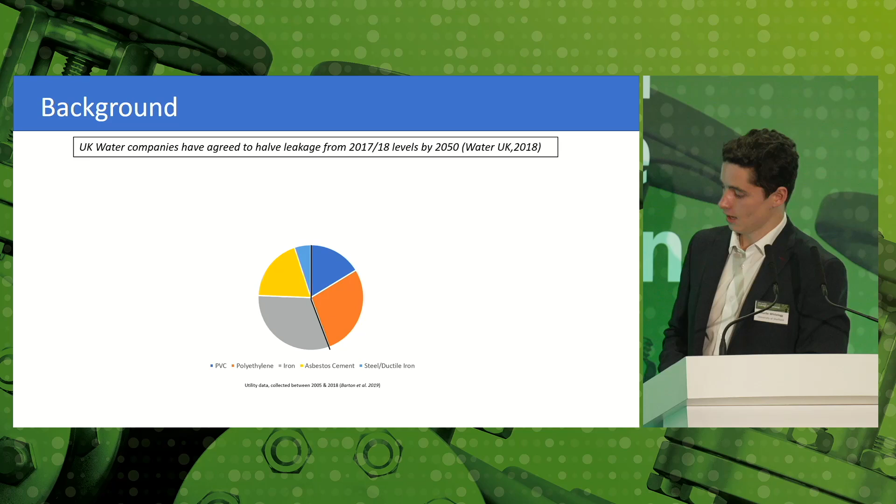So just to begin, as everyone here will know, there's a commitment to halve leakage levels by 2050, so it's quite important that we find them. So I'm focused particularly on localization. I think currently the majority of our pipelines are either iron, asbestos cement, or steel. They're known as elastic pipelines, so they're quite rigid. And that means that they're very well suited to acoustic methods. So sound travels quite well along them, so in those pipelines, acoustic methods work really well for leak localization.

But we also have increasingly plastic pipelines, which have a bit more of a variable response, which are known as viscoelastic pipelines, so polyethylene, PVC. And one of the things that I'm suggesting is that transient-based methods can fill that gap and help us to locate leakage in these plastic pipelines.

So just to quickly go over it, a transient is when you generate a pressure wave through a rapid change in water velocity. So if you have water going through a valve and you close it suddenly, you generate a pressure wave which propagates through the system. I think last year there was a presentation here about the damage that they can cause, and there's been a lot of focus on calm networks. But there is the flip side to that, where if you control them, if you make sure they're below a certain magnitude and a certain threshold, and they're safe, they can be really useful for helping us to locate leakage.

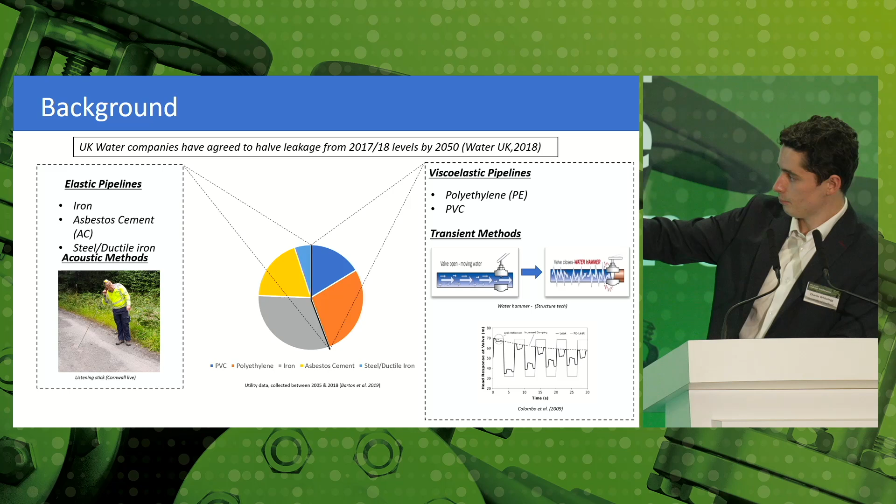So the graph on the bottom there shows, it's slightly hard to make out, but when there isn't a leak in the system, there is a different pressure response to when there is a leak, because you'll get negative pressure reflections, which will sort of take chunks off your pressure waves.

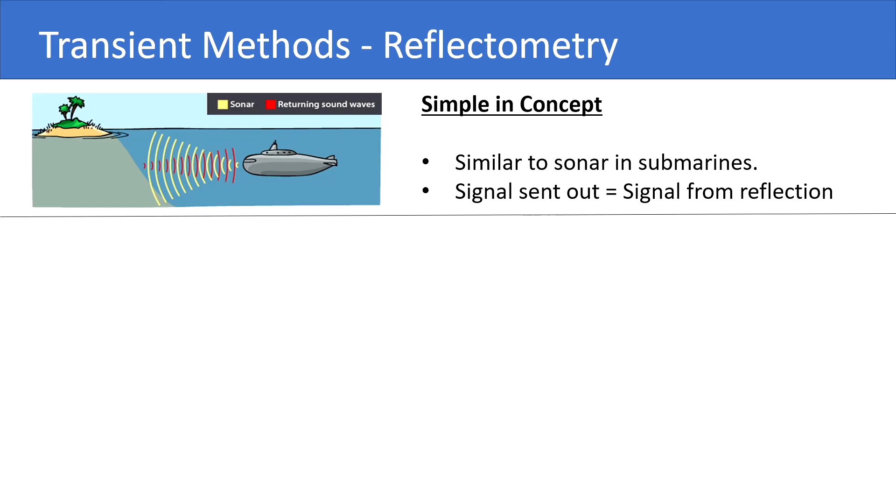So one of the cornerstones of transient-based methods is reflectometry. So it works quite simply like sonar. So you send out a signal which has a certain shape and a certain profile. And if that interacts with a feature, it could be a branch or a leak or a reservoir, you'll get a reflection from that signal back. So the signal sent out is a signal that you get reflected from points of interest, in our case, leakage.

But if you have a variable closure, so you close it, open it, and close it again, you'll generate a slightly more complicated transient signal.

Apologies, my microphone's dropped off. I might just have to hold it for a second. Let me just use that.

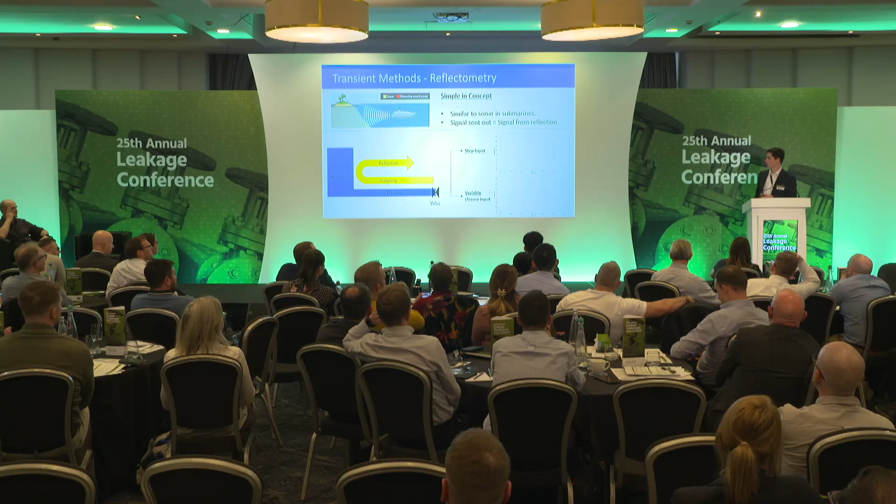Okay. So if you have a closure followed by opening followed by closure, you'll get a more complicated transient signal. And what you can see from the bottom right graph when you have this is that the signal sent out is more complicated, but the reflection that you get back is also complicated. So if this method is dependent on recognizing patterns of transient waves, then it's important to account for that.

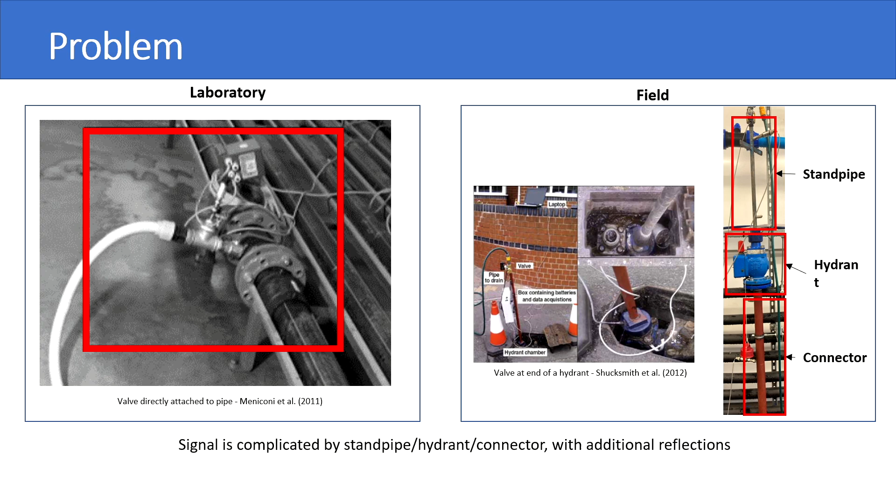But in the field, we don't have access to those points. It's more likely that we're going to have access to a hydrant, which is going to act as our point of induction. And in those instances, we're going to have a standpipe with a valve attached to the top of it, more than likely, followed by a hydrant, which again complicates the signal, followed by a connector, which then feeds into the main pipeline.

And all of these features will complicate the signal, causing additional reflections, which means that it's harder to recognize the pattern that's coming back because you don't know what's getting sent out in the same way. People in academia have realized that, and they've discouraged the use of hydrants as pressure wave insertion points, which isn't very useful at the moment for transient-based methods because hydrants are the only available points of induction.

So before I move on to what I think the solutions could be, I'm just going to elaborate on why it's a problem. So I've got two comparative systems here: on the left I'm modeling a hydrant induction point, so it's got the standpipe, the hydrant and the connector, and on the right I've just got a side discharge valve, which is more typical of what you'd see in academia.

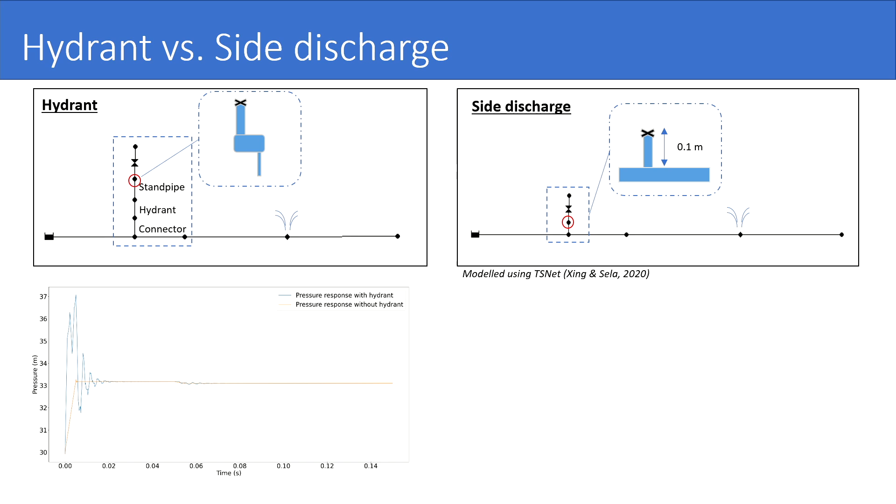And the pressure wave responses, you can see on the bottom left there, you get a far more complicated signal as soon as you induce a pressure wave at a hydrant. You're going to be getting reflections, a change in the magnitude measured, and importantly, when you zoom in on the leak reflection itself, you see that it's got a very different shape. So hydrants change the outgoing signal and the reflected leak signal. So if this method is dependent on understanding what's getting sent out and what's going to come back, then we need to account for this somehow.

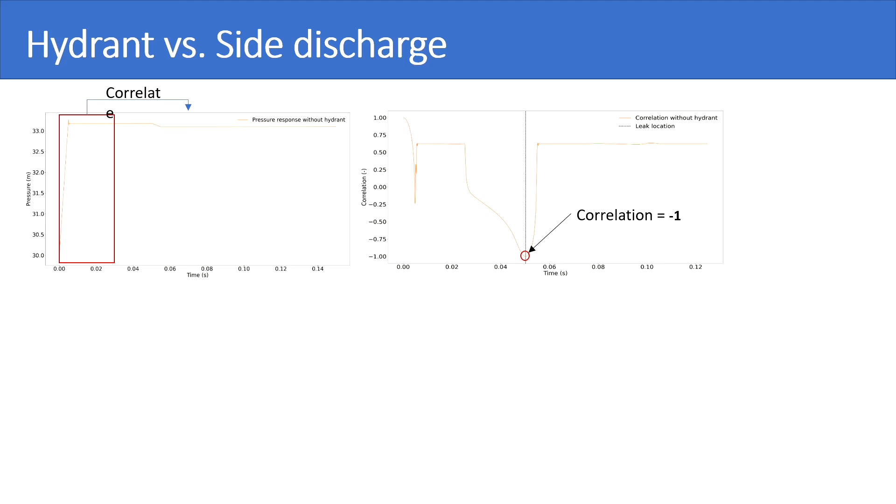So those are the pressure signals. How does this affect leak localization? On the top left is a graph of the pressure waves, which you saw on the previous slide, generated with a side discharge valve. And if we just take a window of the induced signal and move it across to try and find points of the signal which have the same profile, we find an ideal negative correlation at the leak location. So it's a correlation of -1, which is perfectly negative, which is what we'd expect in an idealized situation, and it coincides perfectly with the leak location.

But when we do the same thing with the hydrants and move the red window across and correlate the rest of the signal, first of all, we find it's far more complicated because the red window correlates with itself in a different way. But the important takeaway is that at the leak location, we've got a far weaker negative correlation. So if that was masked by noise, it might mean that you wouldn't notice the leak in that case.

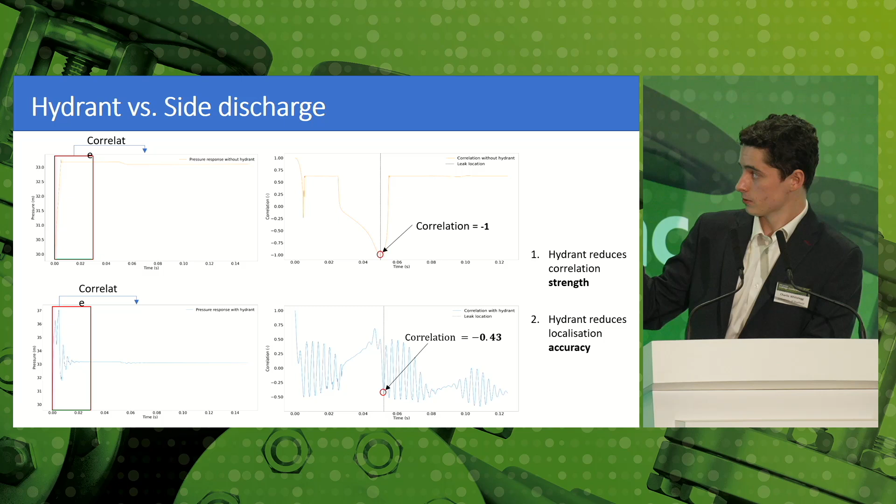And also, it's important to note that the maximum negative correlation in this case, which is indicative of a leak, isn't actually occurring where the leak is in the system. And this is all modeled. So hydrants reduce the correlation strength, which is a huge issue when we've got noise in systems, which we always do. And it's also going to reduce our localization accuracy.

So is there a solution to this, bearing in mind what I've said before about hydrants currently being the only realistic access points? Well, if we can model the standpipe, the hydrant, and the connector, we can determine how those features would change the shape of the wave as it passes through into the pipeline, and we'd also be able to model how the reflected wave would change as it's reflected back through to the sensor.

I've recently had a paper published which has shown that for the connector, so the bit that connects the bottom of the hydrant to the main pipeline, we can calibrate the properties of those, leading to more accurate leak localization. And we can calibrate those using a pressure sensor on the top of a standpipe. And when I say calibration, I'm talking about calibrating the diameter when it might be unknown, the wave speed when it might be unknown, or the length.

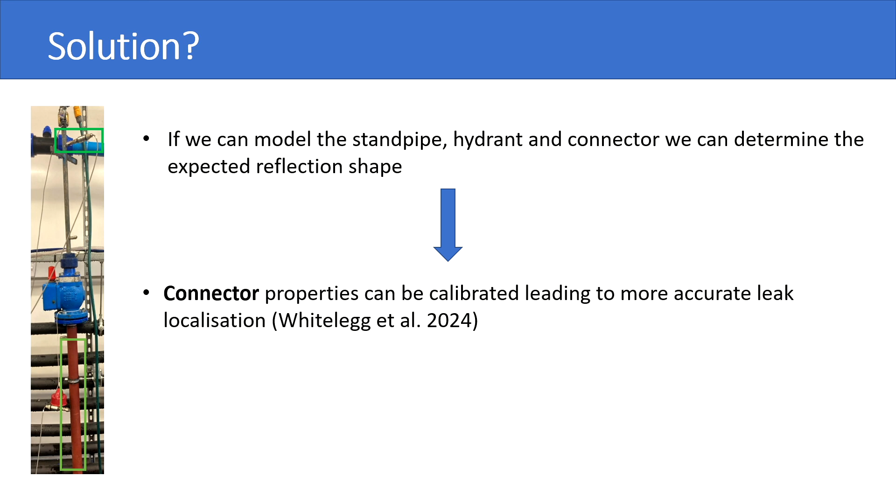But there is a big unknown about the hydrants. Do different hydrants, which are on networks, mainly through bore and screw down, change the transient wave as well? Because if that's the case, it's going to be far more difficult to model because they're all approximately the same length, they're all approximately the same diameter, they're all made of the same material, but they have different internal shapes. So if that is the case, it would suggest that we cannot model them simply.

So how have I tested this theory? Well, we've got a laboratory in Sheffield, and there's a schematic on the top right of a simple system. We have a pump which flows water through the system. It flows up through the connector, through the hydrant, through a pneumatic valve, and then back through a hose into the reservoir itself. Each time we control the flow using a flow control device on the end of the valve, and we've generated a transient using a pneumatic valve, which closes in the order of milliseconds.

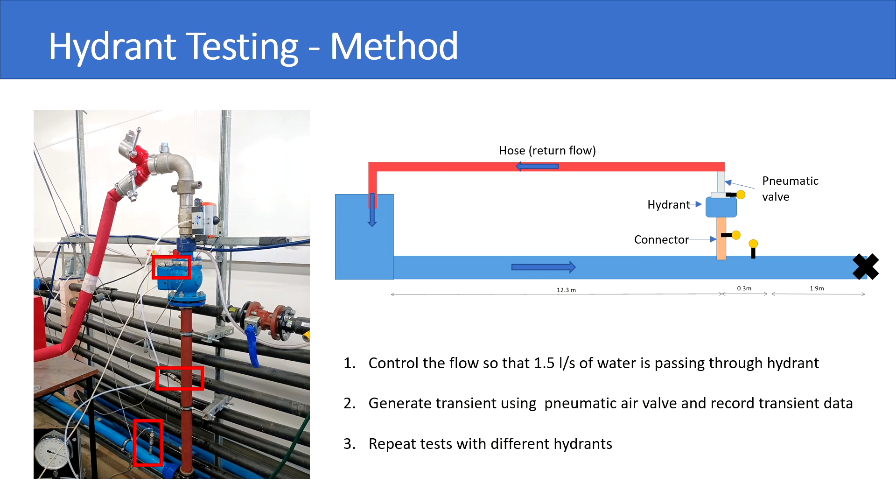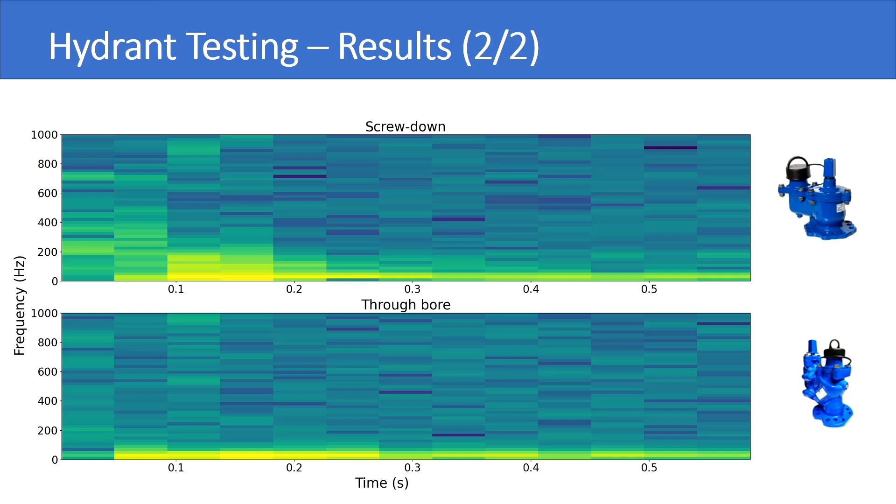Another way of looking at this is in the frequency domain. So this is a spectrogram looking at the frequency components of the signal across time, with the yellow areas indicating high energy points. So you can see with a screw-down hydrant, we've got some higher frequencies indicated by the yellow boxes present, especially early on in the signal. And that would somehow have to be accounted for if this was to be a viable method in the field, at least if we were going to model them.

So does that mean that this approach isn't going to work, or we're going to have to wait for universal access points? Well, I think universal access points, by the way, would be really beneficial for this as an idea, but they're not here yet. I have worked on a method which automatically accounts for the variability in the reflected waves. It's another presentation in itself, really. But it's looking at the repeatability of a signal. That's as brief as I can be.

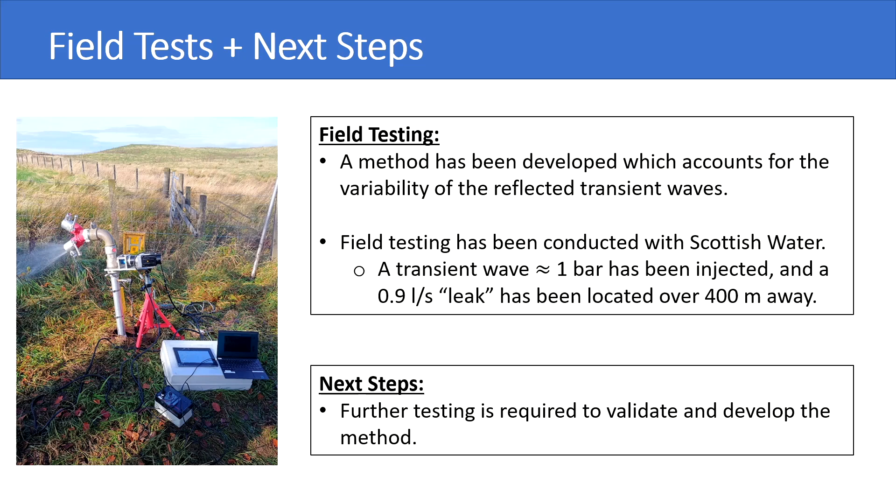And we've taken that and applied it in the field with Scottish Water. And there's a nice picture on the left of the field setup that we've got. And the early results are quite promising. We injected a transient wave of 1 bar to ensure that we were below the threshold of the pressure rating of the pipeline. And we simulated a leak over 400 meters away on another hydrant by opening it slightly. And through that, we've been able to pinpoint that leak location.

Now, I want to stress this is very early on, and there's some more work to do in this area. But it suggests that that change which we see as a result of the connector and the hydrant is not an ultimate impediment to transient-based methods being successful, but further testing is required.

So in conclusion, transient-based methods can be successfully implemented if we know the expected reflection shape, or if we have a method which doesn't rely on that. Field implementation currently requires either direct access points to the pipeline, or a method of accounting for the influence of hydrants. But because hydrants are currently the only practical injection points, we need to automatically account for the variability in reflection shapes. So that's the end of my presentation.

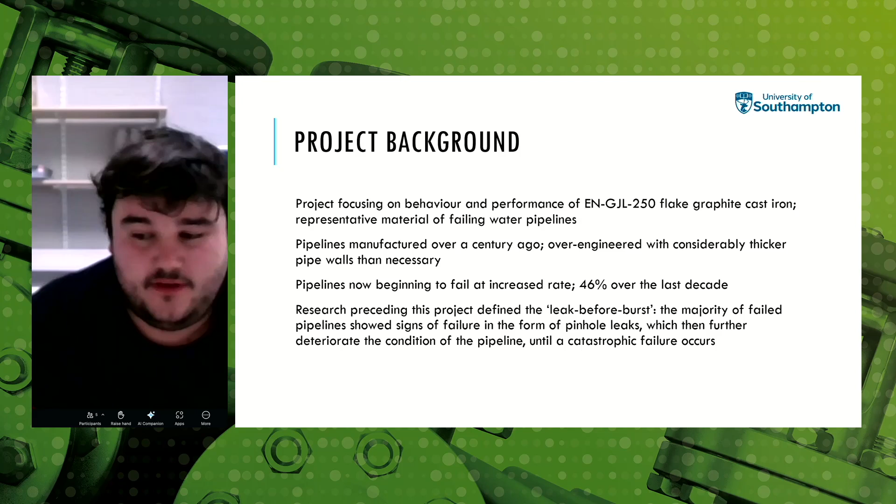Next slide. And lots of these pipelines were made over a century ago, with much thicker wall thicknesses than actually necessary. So we're trying to look at why these pipelines lasted for so long, and what's actually happening on a microstructural level. Next, please. And then with increased failures in recent years, what is the changing element that's causing these failures to occur? Research preceding this project defined the leak-before-burst concept.

So small pinhole leaks develop in the pipeline from a surface corrosion pit, which then deteriorates into a more serious failure. So we're looking to explore how these initial pinhole leaks occur, what factors influence initiation, such as soil conditions, the material microstructure, or the corrosion product layers built up over the years in the ground, and if we can determine these factors, can we start to predict where the next failure is likely to come long before it's noticeable from a serious leak. Next slide, please.

And a large variation in all the phases, particularly the graphite flakes. This is a crucial point, as they can be considered structurally as voids. They effectively provide a stress concentration throughout the material that encourages the initiation and propagation of cracks through the pipeline, and therefore is a huge factor in studying its strength.

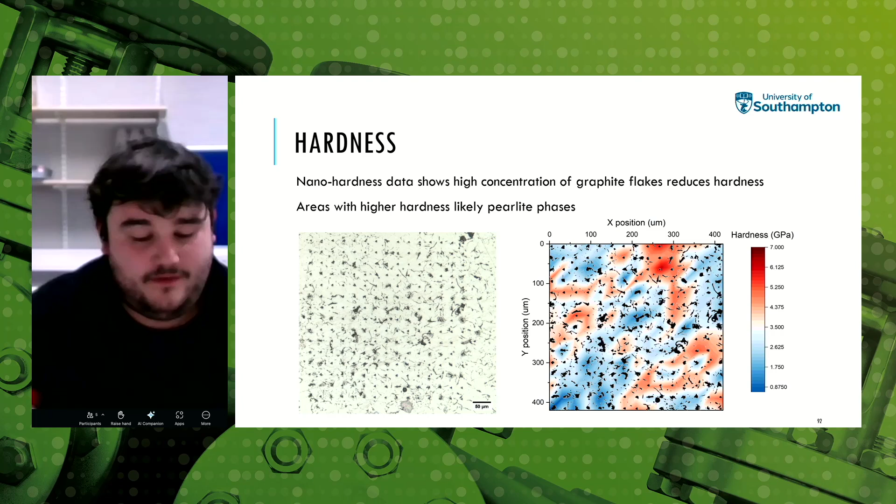This allows us to basically draw there's two regimes in the material: pearlite phases that are mechanically stronger, and ferrite phases that are perforated with graphite flakes that are very soft.

So these ferrite graphite regions are incredibly susceptible to corrosion damage, as these two separate phases have a large different electrical activity, which allows these microgalvanic cells to form on the surface when they're exposed to an electrolyte.

So to explore these first initiations, we've carried out some potentiostatic pulse testing, to quantify the activity of these sites, and understand the potentials at which they begin to initiate and propagate.

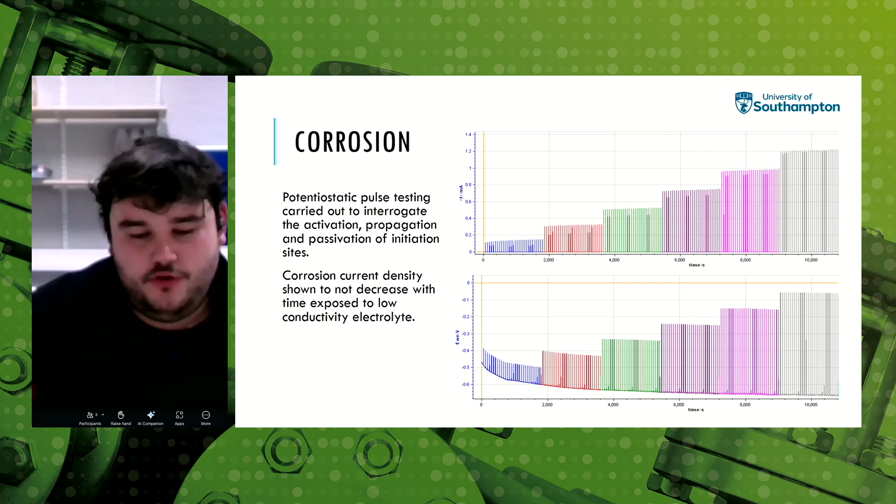We can see here in these graphs, as we increase the potential difference at which we energise the surface, the corrosion current density and therefore the aggressiveness of the surface damage increases at a commensurate rate. However, interestingly, this current density doesn't decrease over time. Just with these initiation sites, they don't passivate naturally as they would in, say, a carbon steel. They continue to propagate indefinitely, provided there's sufficient oxygen supply to the surface to sustain the reaction.

This layer can trap corrosion products that diffuse up from the corrosion front and compact over time into a coherent film, a corrosion product film, that begins to restrict the diffusion of oxygen down to the corrosion front and therefore slow the reaction. As time goes on, these layers further compact and dry out and become denser. They effectively act as a barrier, like painting a pipeline, between the remaining material of the pipeline and the electrolyte and the oxygen necessary to sustain the galvanic reaction on the pipeline surface.

So if we look at the crack growth in damaged pipelines, we have pits on this surface that will then soon initiate cracks. We've done a number of damage-tolerant fatigue tests. We take a bend bar sample and insert a sharp notch into the sample to induce a stress concentration to facilitate a crack in the centre where we can monitor it. We monitor the crack growth rate through the sample to understand the failure mechanisms when a crack is already initiated.

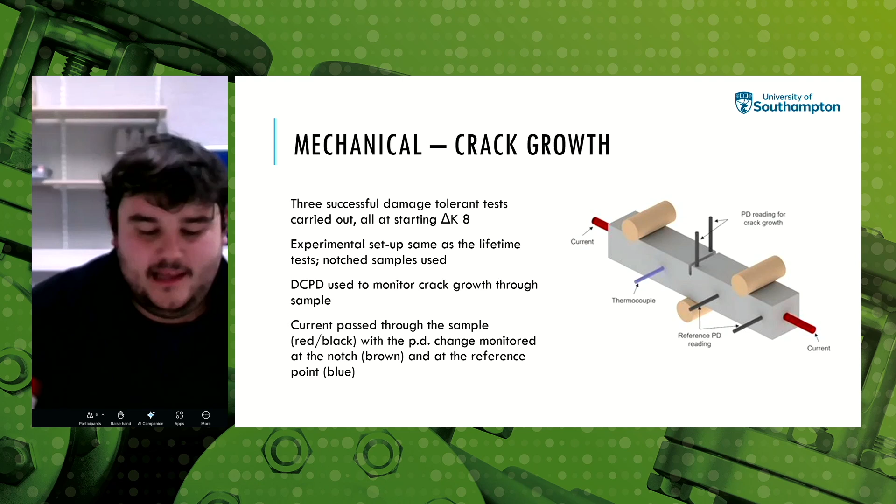And part of the reason here is because we have these two separate regimes going on.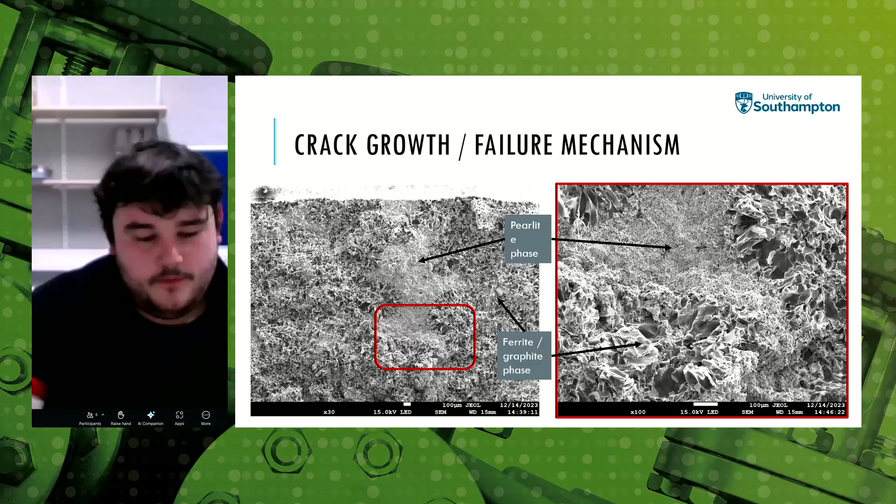Next slide, please. So in this sample, you see a crack growing down from the notch. As you can see, the crack follows the graphite flakes through the microstructure, jumping flake to flake and minimizing the amount of pearlite the crack has to break through. Again, this reinforces the idea that the strength of the pipeline can be directly related to the proportion of pearlite present in its microstructure.

Next slide, please. As we discussed earlier, another crucial factor is the orientation of these graphite flakes. As you see on the screen, the crack growing down through this sample will be easily able to propagate through this pearlite phase, as there's a graphite flake that runs perpendicular to the phase and encourages that crack to split open that pearlite phase.

So, to conclude, the boundaries between these graphite flakes and the matrix are the crucial factor in understanding the performance of this material.

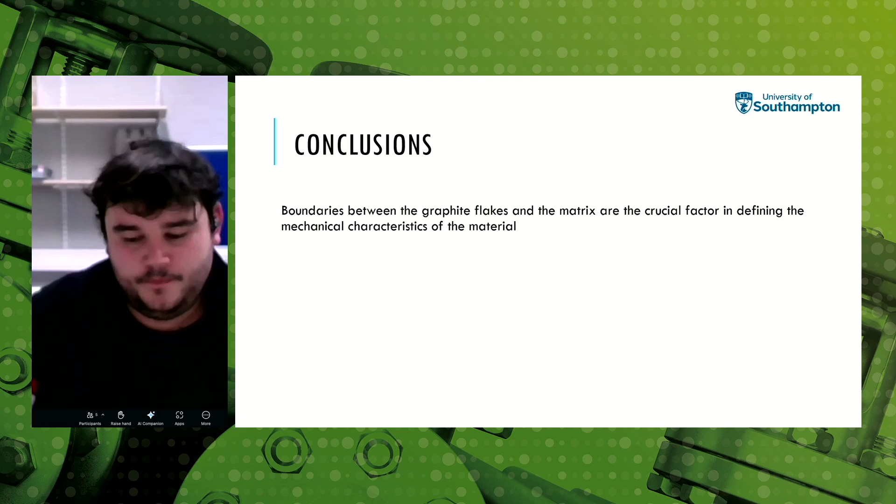From a corrosion point of view, we have these microgalvanic cells, with graphite flakes acting as cathodes and ferrite acting as anodes, that begin to propagate indefinitely, with nothing restricting the reaction except that corrosion product layer that restricts the oxygen supply.

We will see that pearlite provides the mechanical strength of the material, forming an intertwined network that holds the material together, with the ferrite graphite regions filling in the gaps. And it's this microstructural variation that drives where these initial pits will form, and therefore the likely regions where there will be initiation of pinhole leaks.

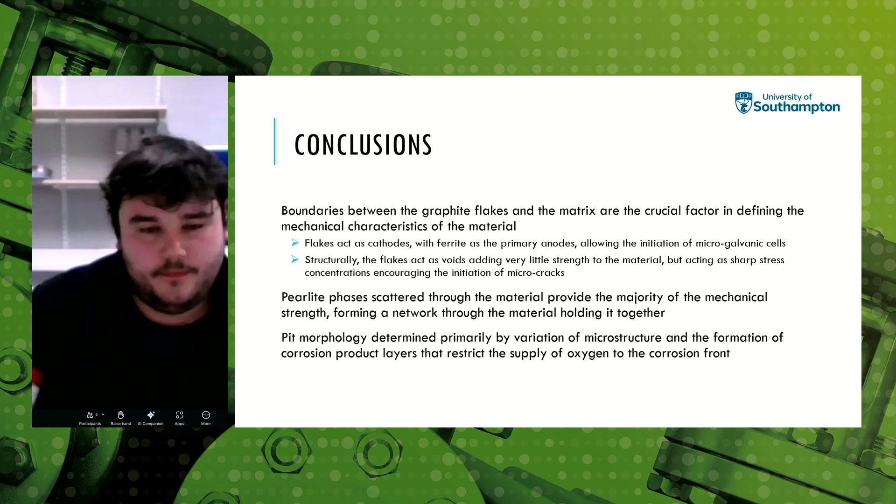Next slide, please. So we've observed that the frequency of loading appears to affect how rapidly this crack propagates in the material. Further testing needs to be done to look into this.

Crucially, we'll now be carrying out in situ testing to study the interplay between mechanical loading and the surface chemistry at the same time, using X-ray CT and X-ray diffraction techniques to look at both the three-dimensional microstructure as well as the changing composition of the product film as the test goes on.

Next slide, please. So thank you for listening to the presentation, and I'll be happy to take any questions.

Thanks, Jeremy. So just to explain what we're talking about today: the influence of ground damage on buried water mains failure. This is in collaboration with some co-workers at the University of Sheffield, and I'm going to be talking about two projects.

So first of all, what do we mean by ground damage? I'm going to talk about part 1, looking at ground voids, voids in the ground, and then the second part of the talk is going to look at potholes, so damage at the surface.

We have voids next to your pipe, which are mostly the problem - that's your internal damage. And then you've got potholes, voids at the surface of the ground, which cars may drive over and then cause potentially something to your pipes beneath the ground.

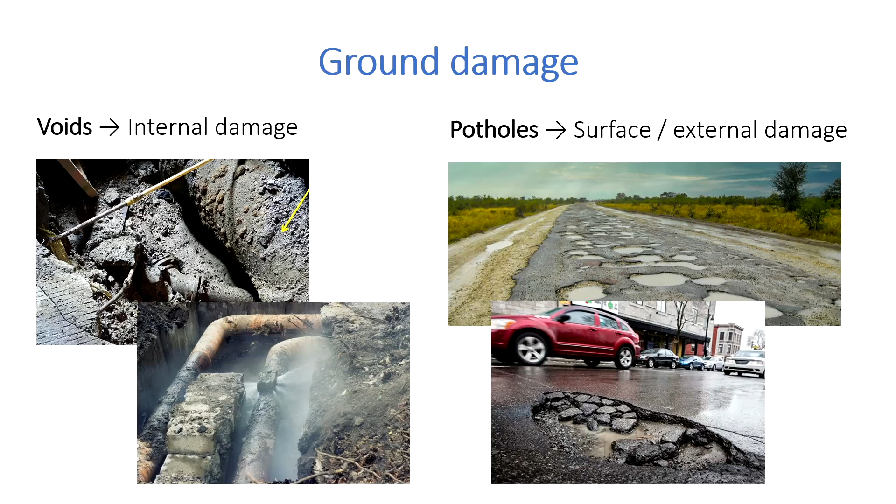I'm not going to go into the many complexities of centrifuge modelling, but I'll give you a few pointers as to why it's really useful. Basically the idea is you can scale your models down. We can replicate the surface damage from, say, a heavy goods vehicle, we can have many cycles of loading to imagine many times that vehicle going over the top, we can look at the pipe location - different depths of pipe, different positions relative to the wheel laterally - and we look at different voids of different sizes.

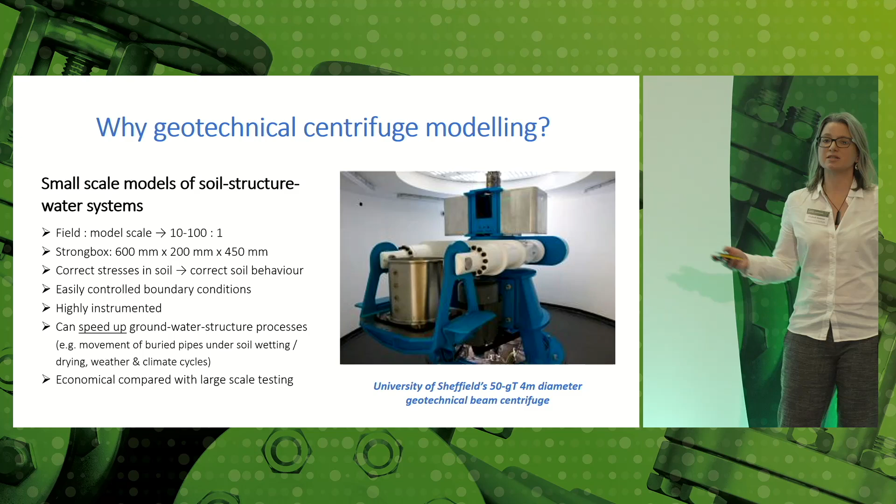Now just a little note about centrifuge modelling - that's a geotechnical centrifuge, the one in Sheffield. It's a 4-metre diameter machine, which is a medium-sized one, and it has a payload on one side - that's the tub thing there, for a specific kind of experiment. It's shown with a tub, which is basically for an axisymmetric experiment, like a pile. On the other side is a counterweight, so the whole point is it spins round and it's balanced, in effect.

The reason why we bother doing that and we take our soil models and any soil structure, water interaction type problem, and we scale it down and pop it in one of those, is because soil behaviour is fundamentally stress level dependent. If we just take a small scale model and we model it at 1G, normal gravity, then we don't get the right stress level behaviour, and therefore we don't get the right stress strain response of the soil.

So in this centrifuge, we can spin our soil up to, from about 10 Gs up to 100. We can actually go to 125, but we tend to stop at about 100 Gs. And that means that we can scale our problems from 10 times smaller to 100 times smaller than in the field. So if we imagine a typical strong box, which is the sort of one that's used in the experiments I'm about to talk about, sort of 600 millimetres by 200 millimetres by 450 in size, that can therefore scale to 6 metres by 2 metres by 4.5 metres, or 60 metres by 20 metres by 45 metres, depending on what we're interested in. So you can actually play around with scaling laws and all the rest of it.

And there are some interesting other good reasons for doing centrifuge modelling. You can control the boundary conditions very well. You can basically put your model into quite small scale condition. You know exactly what's going on because you decide where it's fixed, where it's free. You can measure lots of things. You can put lots of sensors in. You can put cameras in, all sorts of things along your pipe, in the soil, etc., on the boundaries.

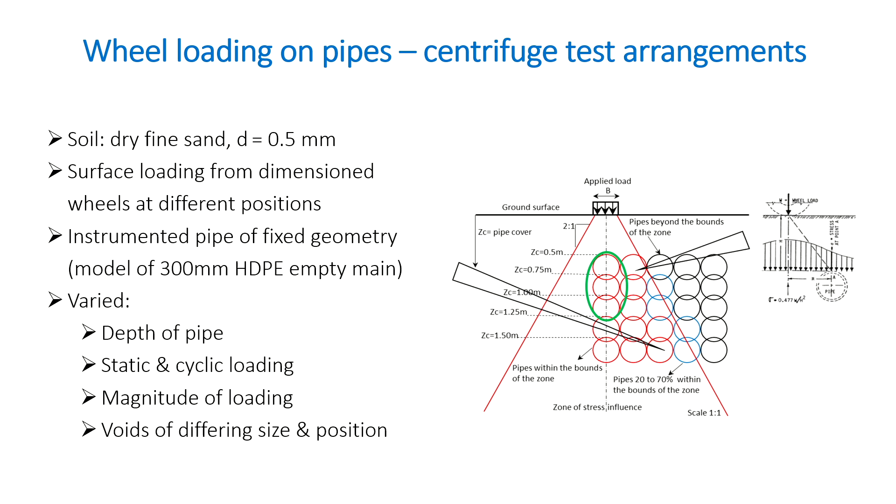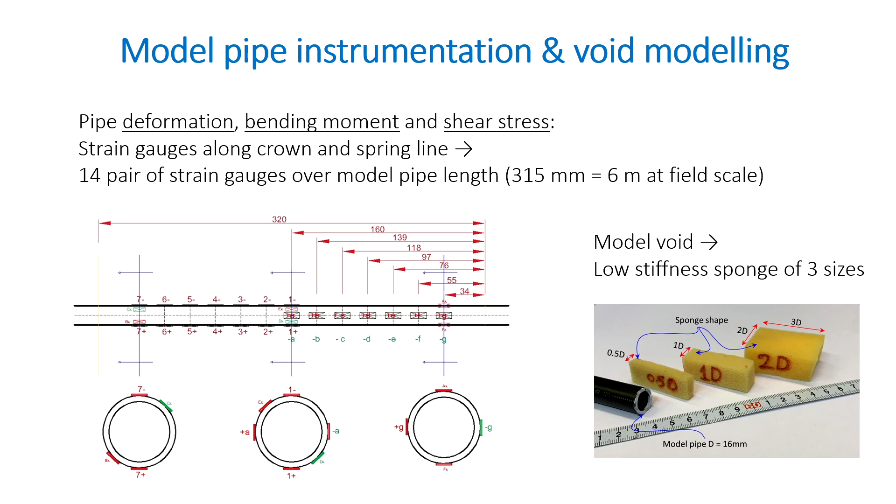The voids were constructed of foam. And this is where physical modelling in geotechnics is really good fun, because you have to come up with ways to fake stuff if you want to do it nice and simply. So basically the foam was enough to keep the voids open whilst it was being prepared, but as you spun it up and started loading it, the foam would start to compress and it wouldn't rebound. So it's a simple way to come up with a void of different sizes relative to the pipe.

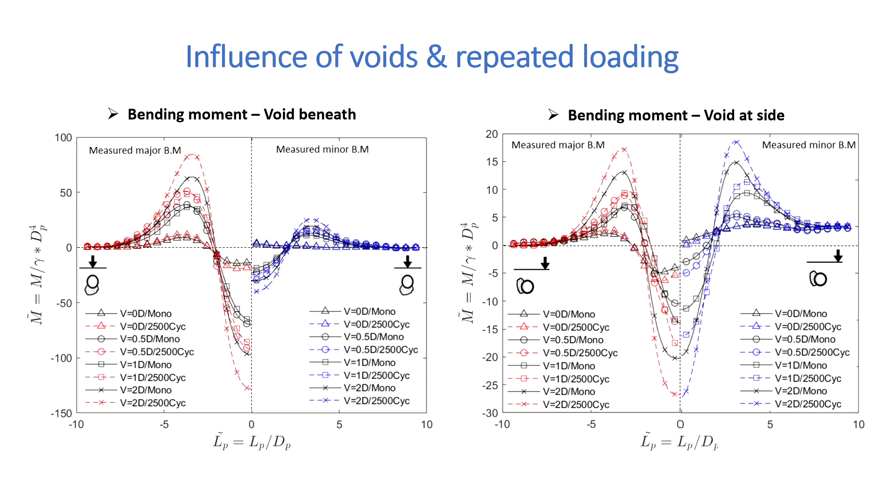And then the red lines are what happens if you cycle. As you cycle, it's ratcheting the bending moments up and the settlement down. So cycling is bad news, not surprisingly. And then you've got an equivalent thing with the void at the side, which is obviously nowhere near as bad. There we are. That's sort of the baseline case.

Okay, just to conclude, this PhD shows that for voids adjacent to a pipe, you get bending moments of up to around 6 times what you found for a no void case at around 2 diameters, for a pipe depth of about 3D. For voids below the pipes, you end up with a magnitude of about 25 times. You've got a big void; it is just bending into that hole, at a normalised, again quite deep, depth of 3 times the diameter of the pipe. Now, these results are only valid for dry dense sand and HDPE of 300 mil. So they're a very specific case study, which is great.

It gets us started. But what about clay? What about the water table? What happens if you've got layers of soil or joints or other materials? Or what about if your pipe has got water in it and it's pressurised? None of that's in this. So we're just looking at that simple case, but it does establish a baseline of where we can go from here. So hopefully there'll be some future work, maybe a YCDT. We're putting a proposal in at the moment, because there's so many things we can do with this.

And the second part of the talk is about a current Acquia project, which is called Understanding Water Infrastructure Risks, Major Bursts, Traffic Volumes, and the Condition of Road Infrastructure.

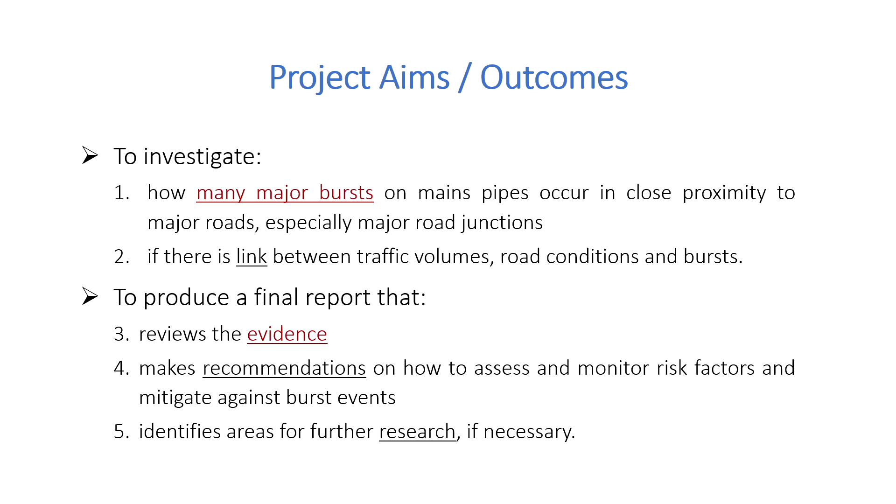So there's been this noting that you've got these increases in bursts. We know that the roads in the UK have deteriorated over the past several years, and maybe there is a link between them. So a pothole produces maybe some sort of water pumping from vehicles, produces some loading, produces traffic jams, lots of water on the road.

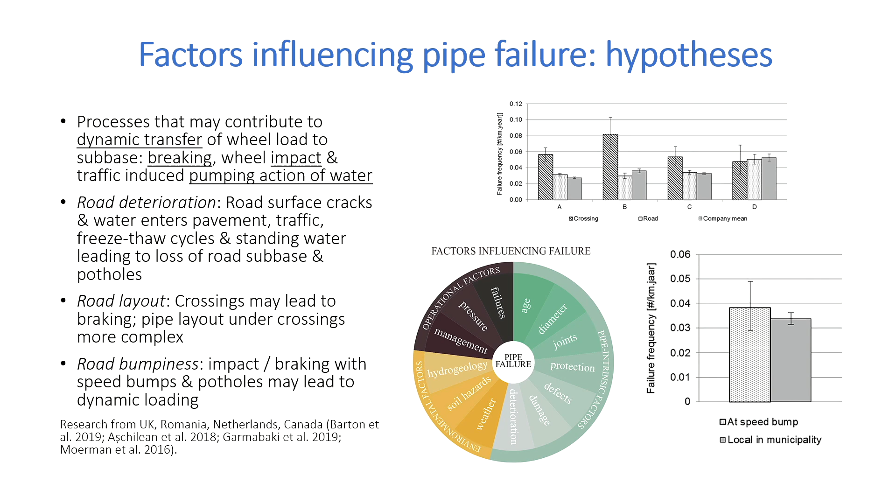There's been a fair bit of study, this is just a little bit of literature out there, looking at the influence of crossings, looking at speed bumps, and various other things, road deterioration, not perhaps per se, but speed bumps sort of give you an idea. And there are some ideas about how these things may all relate. So part of this work is to do a lit review to find out what other people have done and see where it fits in with this idea.

So our workflow: basic project initiation was in September. Literature review is ongoing. Case studies, they're also ongoing. It's not actually one after the other. We're trying to start those now. And then we're going to look at what's needed in research and undertake a final report. So, the challenges.

Okay, so we may think that there's a link between road deterioration and heavy traffic and mains bursts. There's a role of different things. So the geometry and condition of the road and the traffic volume. These are things outside the purview of the people in this room. But pipe location, burial depth, soil type, soil moisture, that's known by water companies at least to some degree. Pipe geometry, age, condition, etc.

We need your data to do this properly. And we have some of the data, and some people have been fantastic. Some companies have given us, and we've already started talking to a number of people about giving us, detailed data for case studies. And we also have statistical data from the mains failure database and the attached pipeline network data, which is that thing on the left.

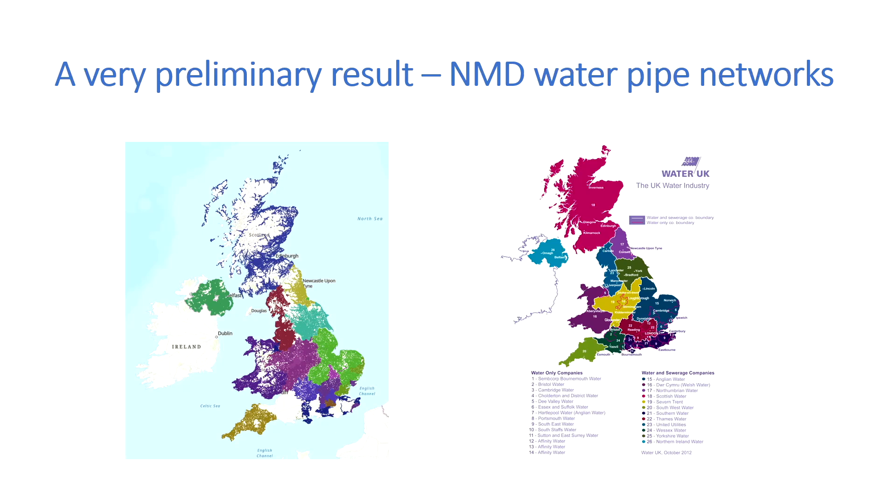So on the right is the official divvying up of the UK into the various water companies. On the left is what we've got out of GIS. We've just dumped all the pipes that we've taken from the mains failure database, the pipe bit, into that. And it takes a very long time to load. But when you get it, you can then match that up to the actual pipe locations, hopefully, and we can see, up to 2018, because that's how far it goes, basically what has failed, or where certain pipes of certain sizes and so forth have failed.

And that's great, but there is no depth data in that database. And that, for me, is a killer. So having just shown you the previous bit of work, there's a lot of information, material, etc., but there's no depth. And I'm hoping that somebody in this room can tell us how deep your pipes are for different pipes. Maybe you've got that information somewhere and it's not in the database, but it might be in your own database.

So what we're hoping is that we can make this a valuable Acquia project, providing information about mitigation and management, about the situation if there is an issue there, but we can't do that unless we have the information from you to make sure that we get the best from the project. And that means, in particular, pipe sizing, geometry, depth, soil type, all those things here, we need your data. So if you would like to contribute, that would be fantastic if you haven't already told us, because we're obviously talking to a few people.

So just to give you a quick who to talk to, there's Torfeg and myself about Torfeg's project. You can also talk to Ed with John. Ed was the guy who talked about corrosion and fatigue and so forth in the last conference. He's now our research associate. He's a kind of pre-doc because he hasn't officially had his thesis examination yet, but he's working on this, and you can either talk to him or myself to give us anything you like or discuss any thoughts you have.